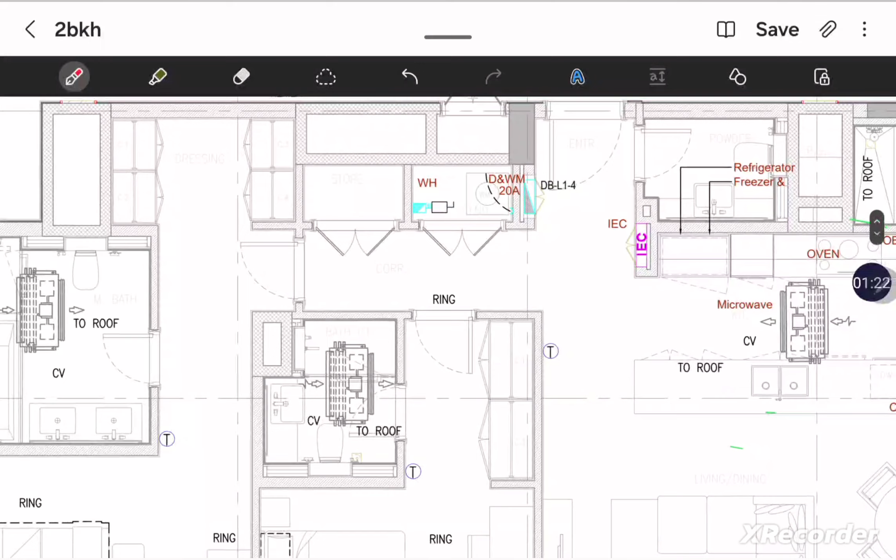Then we have one laundry and one storage area. Then we have one powder toilet which is for guest use. Then we have one maid room and maid room toilet. We have one open kitchen and we have one dining and living area.

Let us place first double socket and single socket as per requirement. So here there is one master bedroom, so we need one double socket here, and here we need double or single socket. So let us take single socket. Here in front of the bed we will place the TV, so we will require double socket.

Now let us move to our next room, that is the children room. Here also the same. Near the bed we need one double socket, other side we need single socket, and in front of the bed we need one double socket for the TV power.

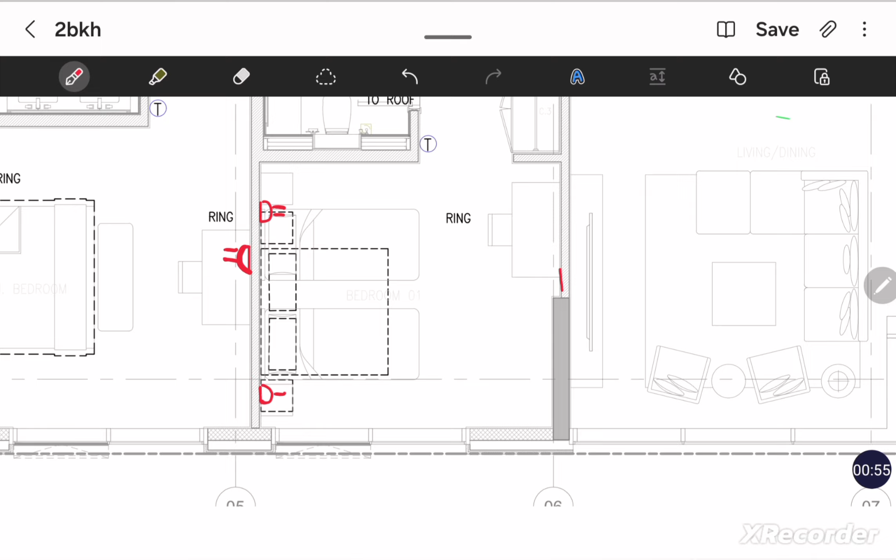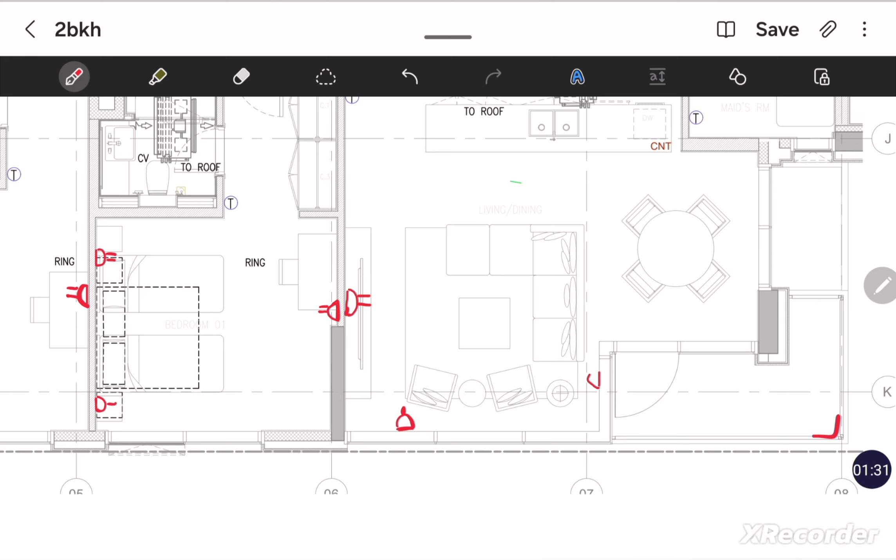Now let us move to the living and dining area. Here you see there is one TV placement, so we need one double socket near the TV. Here you see there is a sitting arrangement and this is the wall, so we will place one socket here and one socket will be here. It could be single socket or double pin socket.

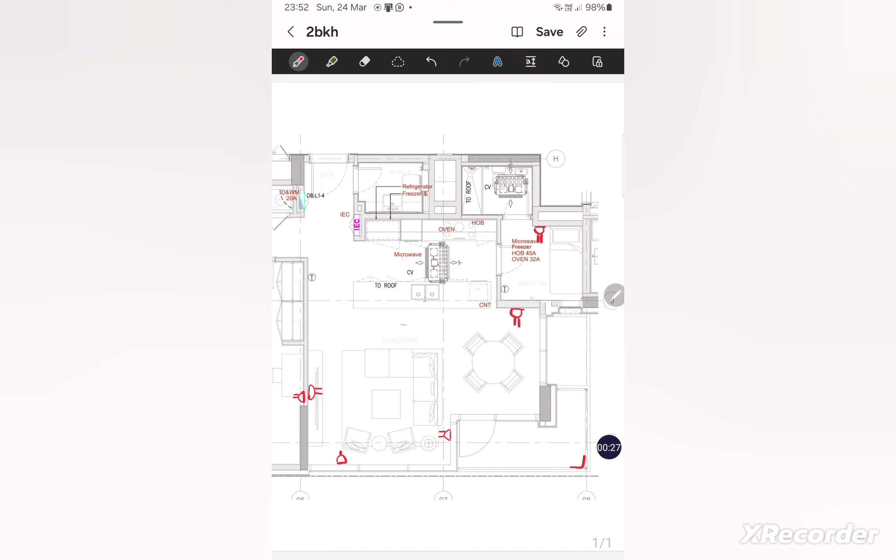Now we will place the single or double socket for the dining area. So we will place one double socket here near the dining table, and for the maid room we will place one double socket here, and we could place one more socket here in the maid room. Apart from that, we need one socket also here for the corridor and for cleaning purposes.

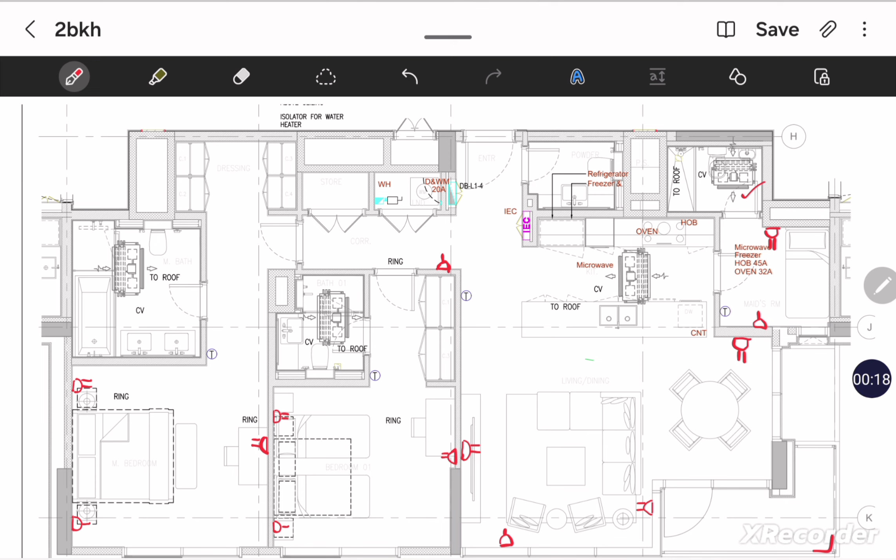Completing the single and double socket placement, we will consider the power points for the FCUs. Here you can see there is one FCU. Here there is one FCU. Here there is one FCU. Here there is one FCU. This FCU will feed the maid room and its toilet. This FCU will feed the living and dining area and the passage.

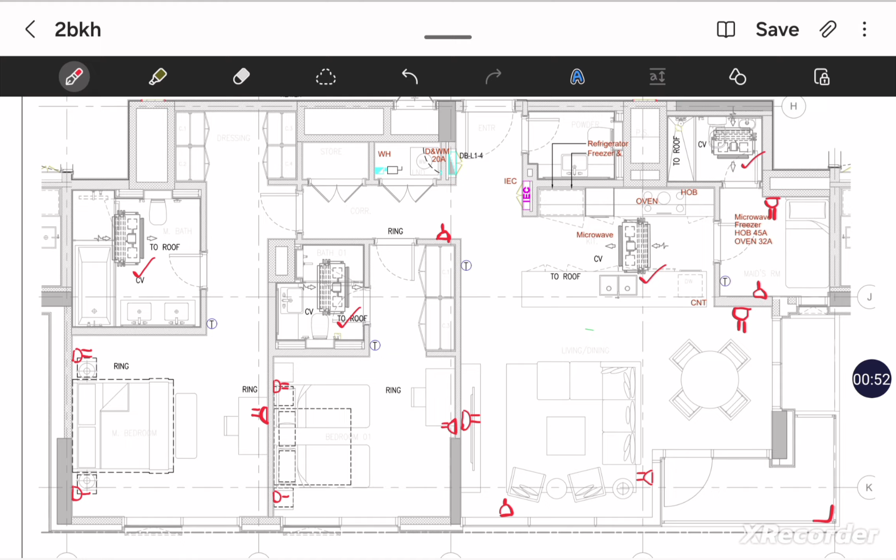This FCU will feed the children bedroom, and this FCU will feed the master bedroom and its related passage and dressing room. So we need to arrange the power for this FCU. For that we will place one spur outlet for the FCU. So here I place one FCU spur outlet. Here I place one FCU spur outlet. Here I place one FCU spur outlet, and here I place one FCU spur outlet.

Hope you are clear. Let us focus on placing our power outlets as per the required load in the kitchen. Here you see this is the fridge. This is the microwave. Here there is an oven and hob inbuilt. We have one dishwasher here. So we will place our power outlets as per the equipment.

So for the fridge we need one 13 ampere socket. For the microwave we need one 20 ampere socket. For the oven we need one 32 ampere socket. For the hob we need one 45 ampere socket. And for the dishwasher we need one 20 ampere socket or spur or flex outlet.

As per the DEWA regulation, we have to provide the DP switch also for some equipment like hob, oven, microwave and dishwasher. If you're wondering how I selected the rating for the microwave, oven, hob and dishwasher, you will check it from the catalog of the final fixtures. Then you will find their load also. Based on their load, you have to select the flex outlet rating and in the DB their breaker rating.

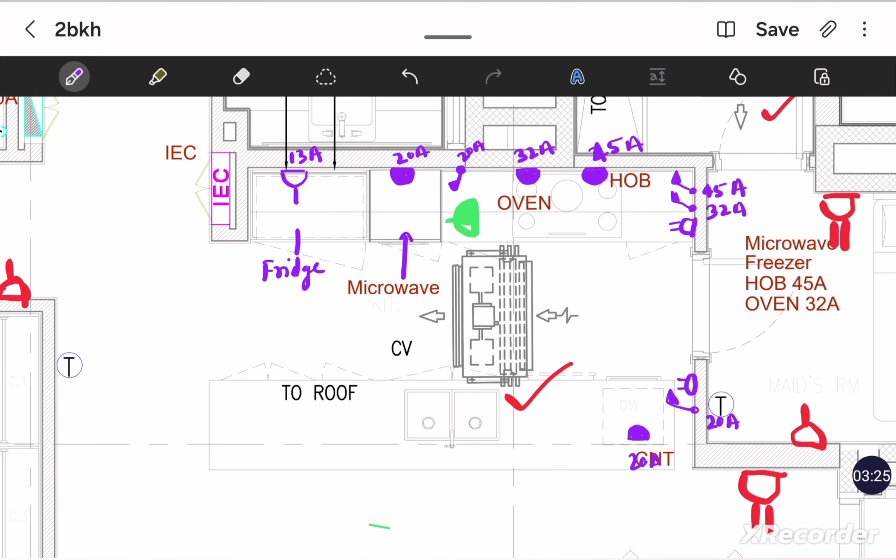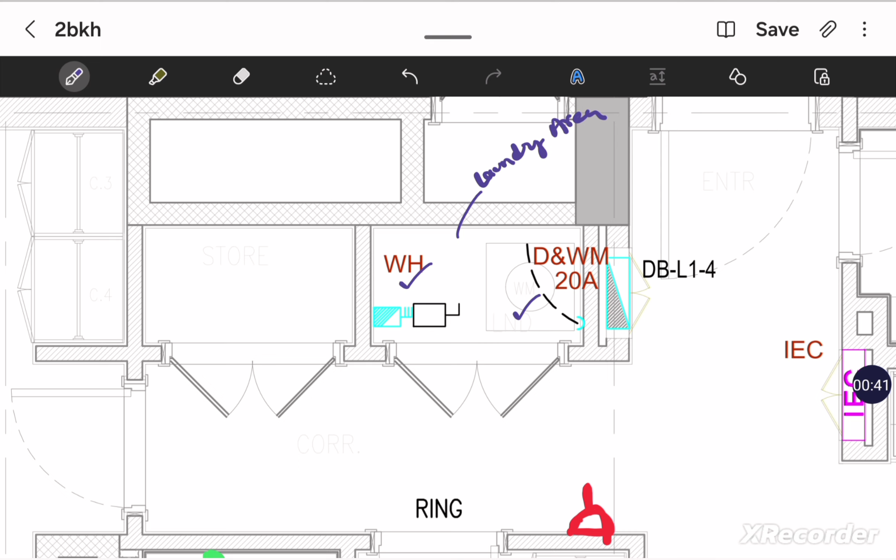After placing power sockets based on the equipment in the kitchen, now let us focus on the laundry area. This is the laundry area. In the laundry area, we have two things. One is washing machine, one is water heater. Here in this apartment, it is a centralized water heater, meaning in each bathroom we don't have any water heater. We have one water heater for the full flat and it will supply the hot water to every bathroom. Okay. So here there is one circulation pump also to circulate this hot water within this flat.

So we have three appliances here. One is washing machine, hope you can see here WM. One we have water heater and one we have circulation pump. Here it is mentioned, it's not shown here. It is circulation pump. So we have three appliances here. For the washing machine we need one flex outlet of 20 ampere and we need one DP switch for that flex outlet which would be of 20 ampere. Apart from that, we will place one isolator of 20 ampere for the water heater and one isolator for the circulation pump of 20 ampere.

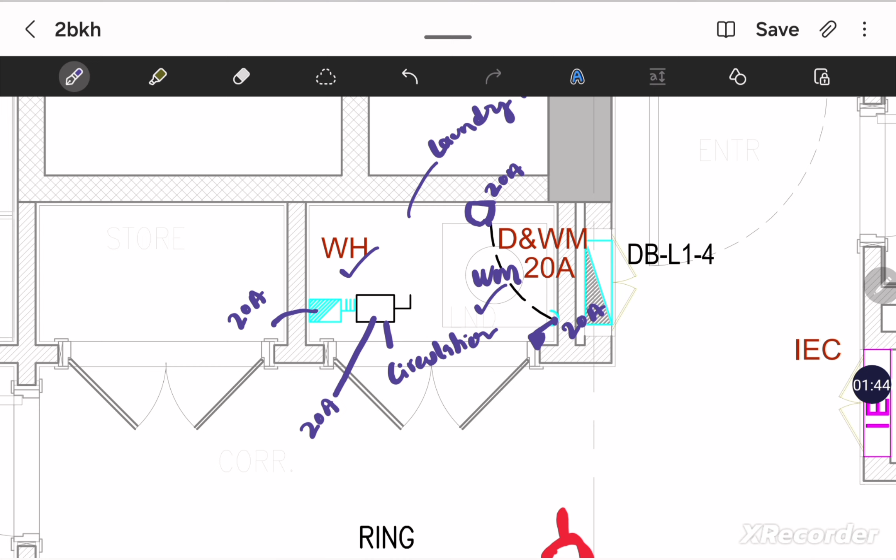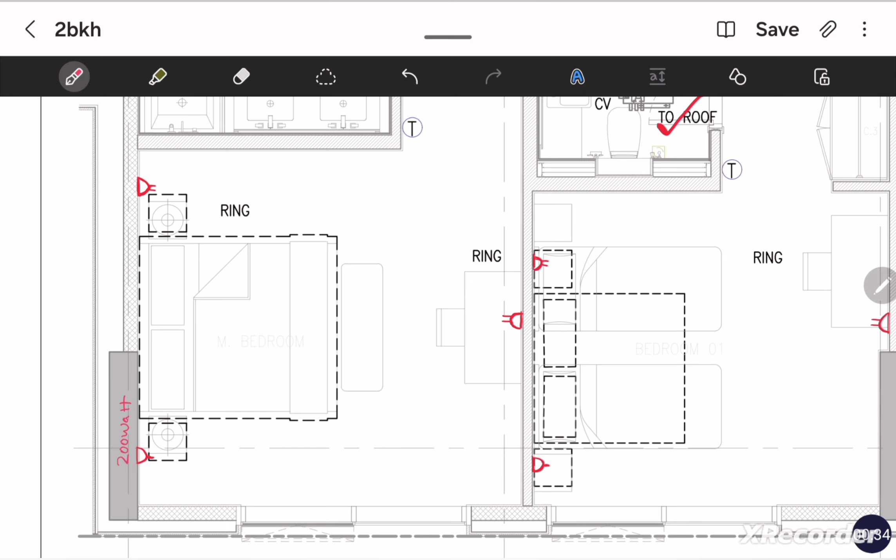Now after placing all the power outlets as per our requirement, we have to consider the load for each power outlet. As per the DEWA regulation, on the single socket the power assumed is 200 watt. So this power socket will have a load of 200 watt. In the same way, this is the double socket. So the load assumed on this double socket will be 200 plus 200, that is 400 watt. In the same way, we will write for all the power outlets. So here I will write it is 400 watt. It will be also 400 watt. It will be also 200 watt.

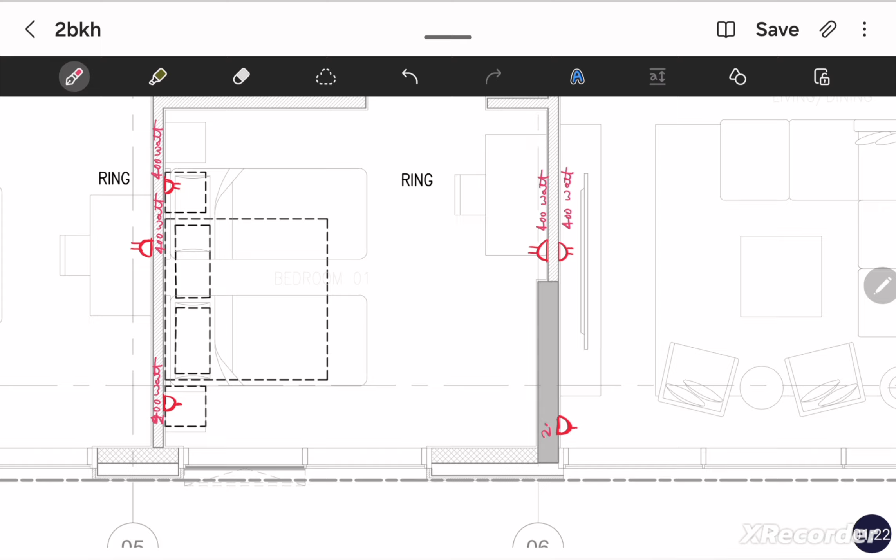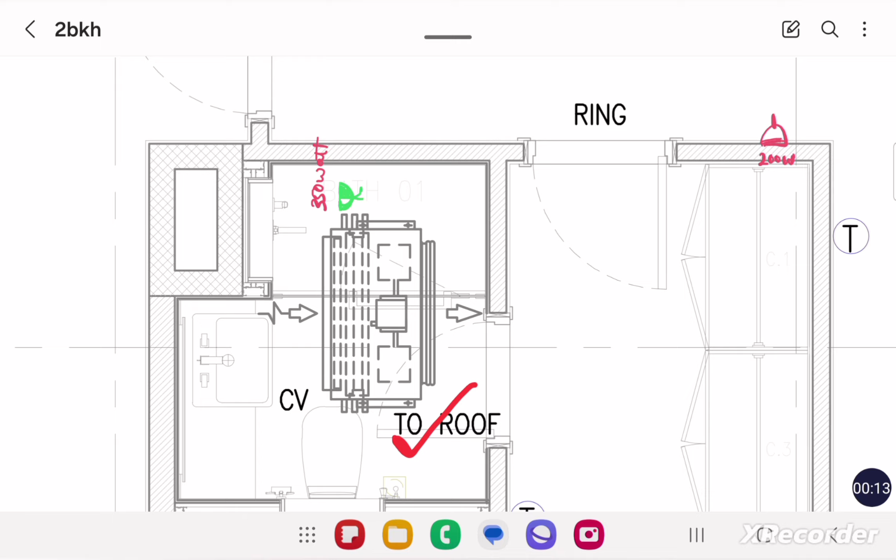This will be 400 watt, 400 watt. This will be 200 watt. Wherever you find the general purpose socket, write the assumed load as per the DEWA regulation. Like for the single socket it will be 200 watt. For the double socket it will be 400 watt. After writing the single socket and double socket load, we have to write the load for each FCU. Here all the FCUs are typical and the load of each FCU is 350 watt. So I mention here 350 watt. I mention here also 350 watt and here also I mention 350 watt.

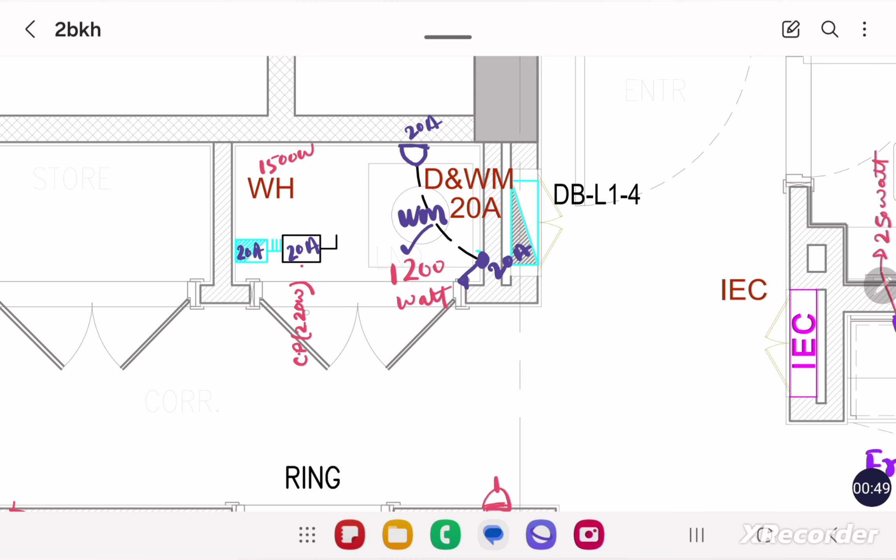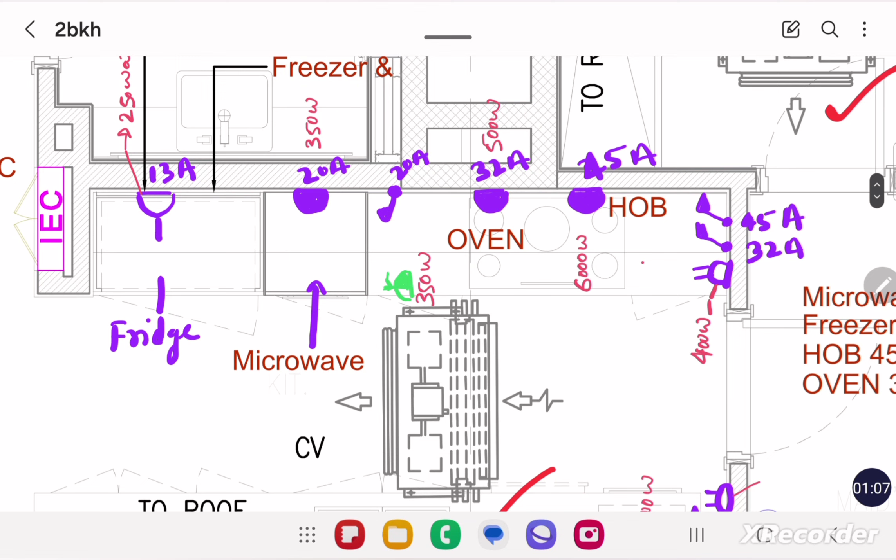After that we have to write the load of the equipment placed in the laundry. So the washing machine has a load of 1200 watt. Circulation pump is 220 watt. Water heater, which is a general water heater for the whole flat, has a load of 1500 watt. If we write the load of the kitchen equipment, then the fridge is 250 watt, microwave 350 watt, oven is 500 watt, hob is 6000 watt and the dishwasher is 1200 watt. So we write all the loads of the equipment placed in this 2 BHK flat.

If you are wondering how I wrote the load for each and every equipment, then I will tell you: from the client all these equipment will be approved and we will refer to the material submittal for each equipment to get the load of that equipment. So by referring to the FCU technical material submittal, we will get the load of the FCU. By referring to the water heater technical material submittal, we will get the rating of the water heater. In the same way for the washing machine, microwave, freezer, oven, hob, this you will receive from the client or from the consultant also. So by referring to that document received from the client or the consultant, or by referring to the technical submittal, you will get the load of each equipment.

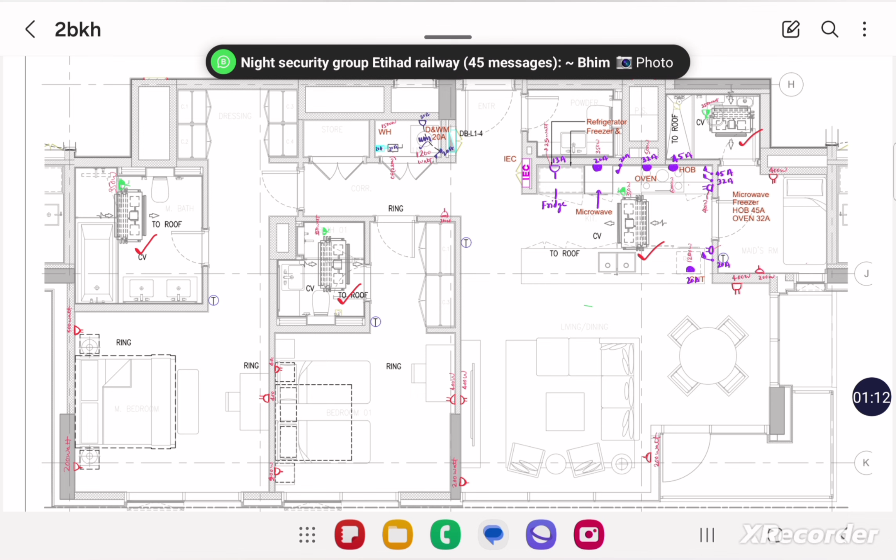There is one more thing I want to add here. If you don't have any information regarding the equipment load, then DEWA also has some general loads for each equipment. And based on the load of that equipment, we have to make a load schedule.

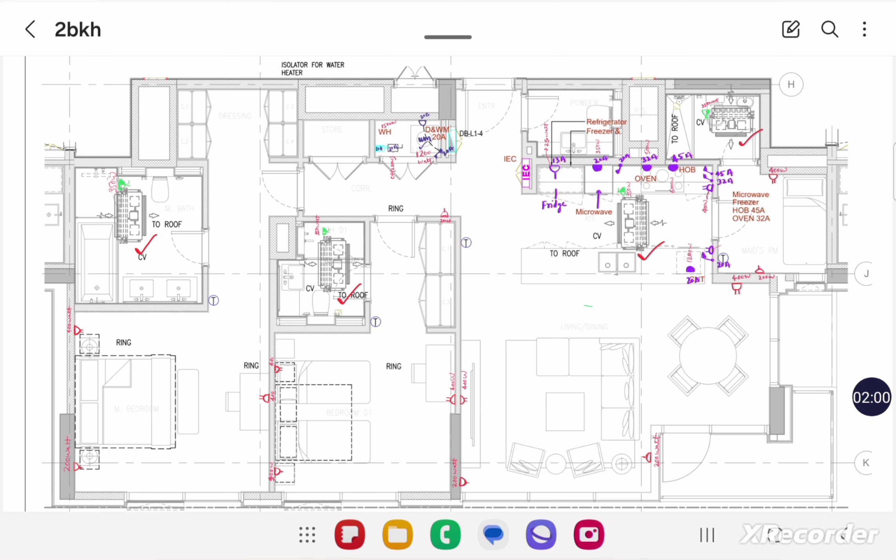But DEWA is also emphasizing that you write the actual load, because in any case you have to reflect the actual load in the as-built submission for the DEWA approval. So better refer to the technical submittal for the actual load of the equipment.

Placing the electrical outlets as per the equipment requirement, we will make the circuit formation between these electrical outlets, but it will be as per DEWA regulation. So before starting the circuit formation between the electrical outlets, let us understand what DEWA says.

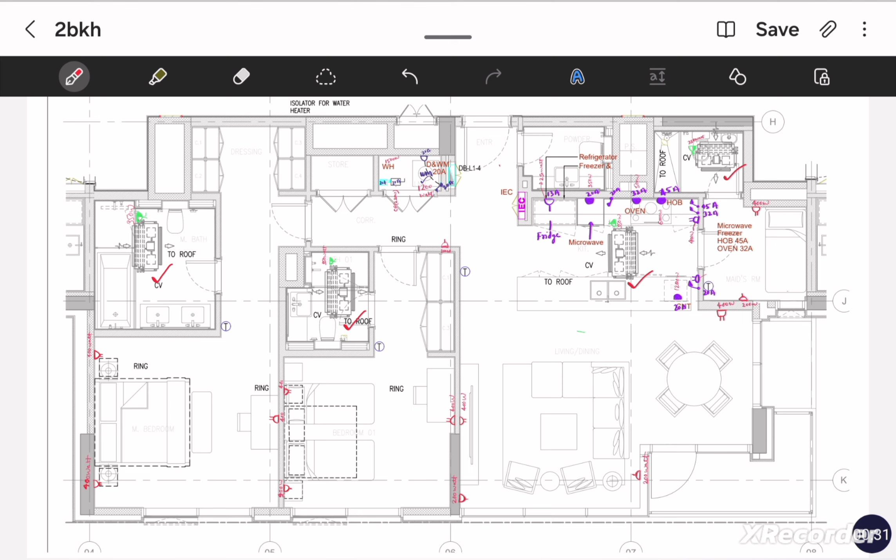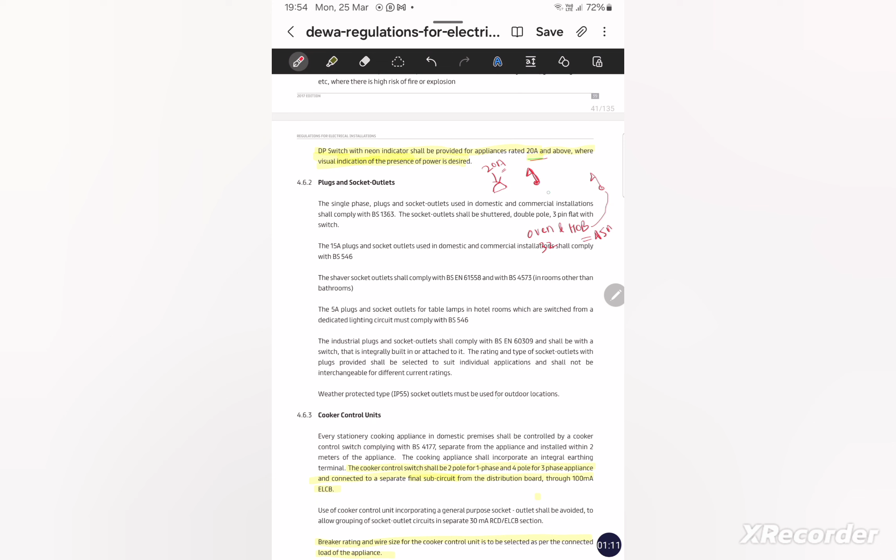So the first thing which you will observe in the DEWA regulation is that if any appliance is rated more than 20 ampere, then we have to use a DP switch for that equipment. So any equipment having a load current more than or equal to 20 ampere, we need to put a DP switch for that equipment. In our case, you notice that for the microwave, for the oven, and for the hob, we provided DP switches depending on their rating. Like for oven, I provided 32 ampere, for hob I provided 45 ampere, and for microwave I provided 20 ampere DP switch. So this is the first thing we observe from the DEWA regulation.

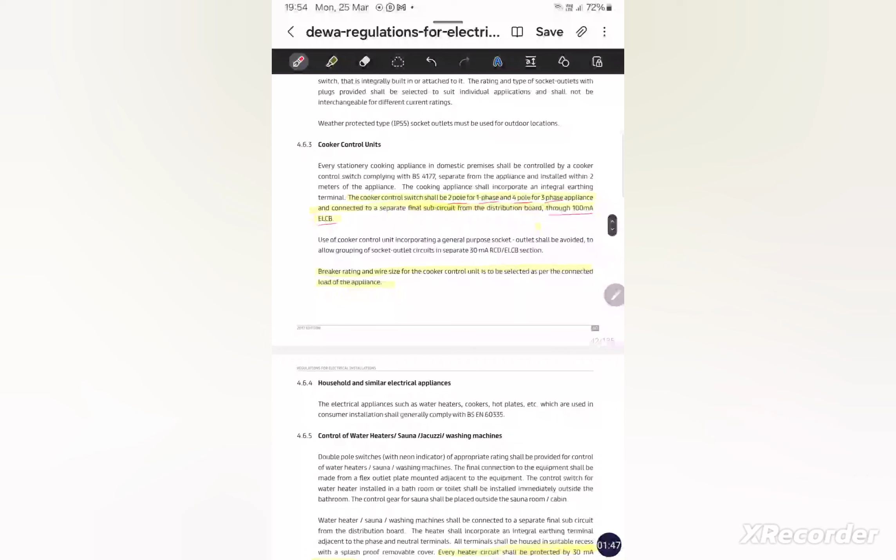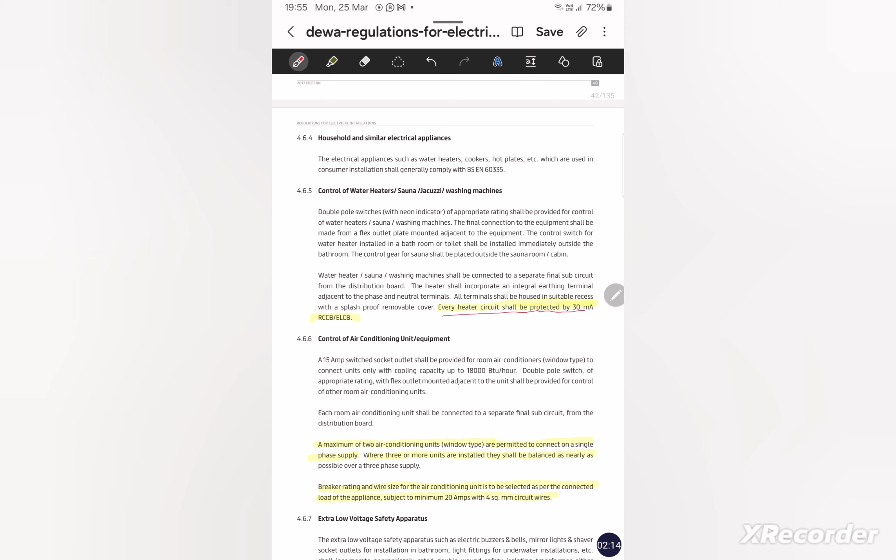Apart from that, you will find that the cooker unit should be 2 pole for single phase and 4 pole for 3 phase application, and the cooker unit must be fed through an ELCB having a sensitivity rating of 100 milliampere. The other thing which you will find is that the cooker wire size will depend on the rating of the cooker. Here the cooker and hob is the same. Okay. Now the other thing which you will find in the DEWA regulation is that every heater circuit shall be protected through a 30 milliampere ELCB or RCCB.

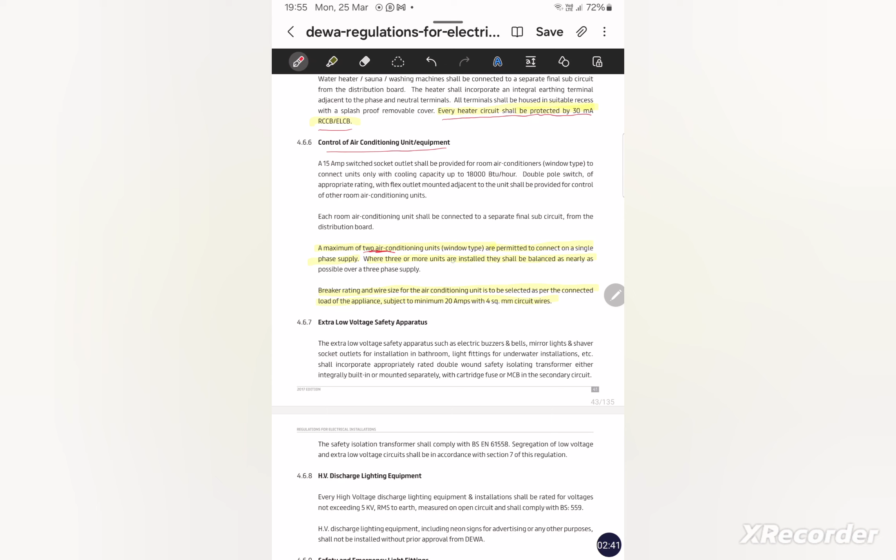For the AC unit, there is one important point mentioned here, that a maximum of 2 air conditioning units can be connected on a single phase supply. Okay. And the other thing which is mentioned is that depending on the rating of the air conditioning unit, we have to select the breaker rating as well as the wire size, but the minimum size is to be 20 ampere for the breaker and 4 square mm for the wires. Apart from that, we will see in the DEWA regulation that in a light circuit, the maximum load allowed is 2000 watt, the wire size should be 2.5 square mm and the breaker rating must be 16 ampere.

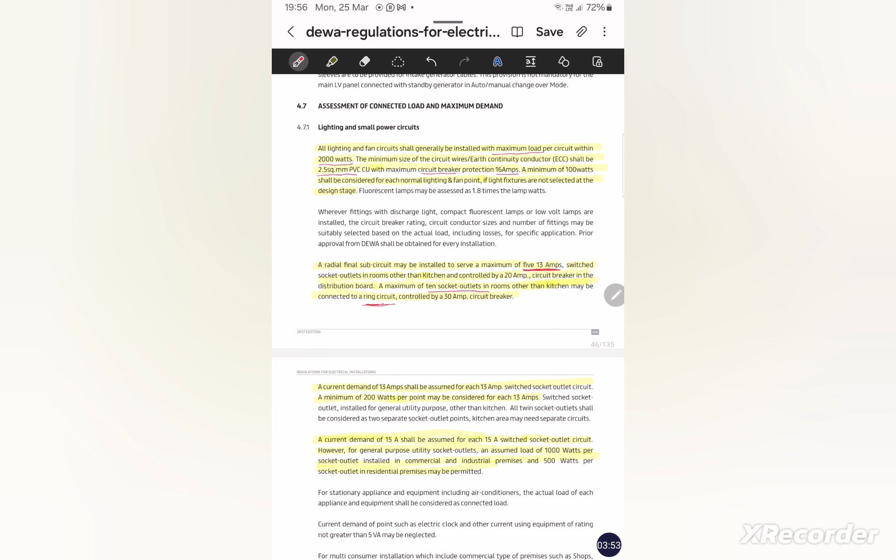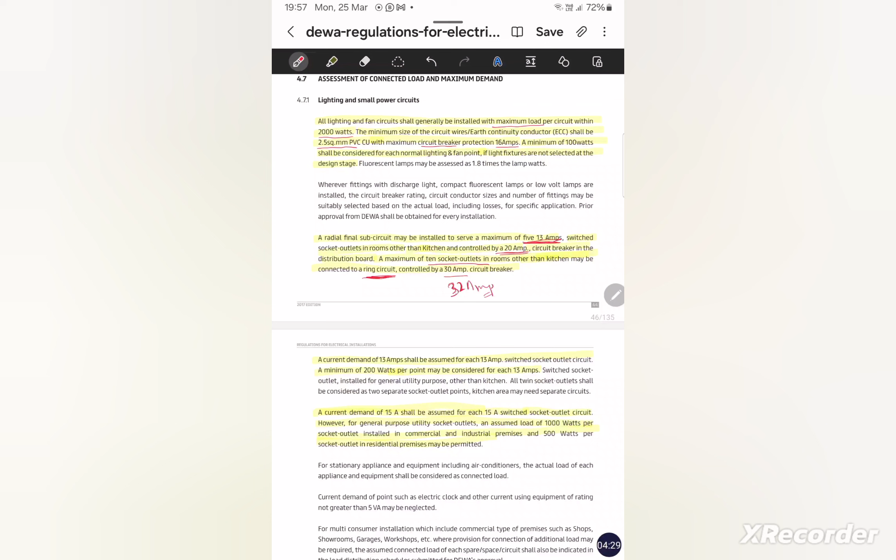Another thing which you will find in the DEWA regulation is that a maximum of 5 13-ampere sockets are allowed in a radial circuit, and 10 socket outlets can be looped together in a ring circuit. Here it is also mentioned that the radial circuit must be fed through a 20 ampere breaker, and the ring circuit having from 5 to 10 single sockets must be controlled by a 30 ampere circuit breaker. Here we will take a 32 ampere circuit breaker for practical reasons, because 30 ampere circuit breakers are not available in the market. So for the ring circuit we will use a 32 ampere breaker, and for the radial circuit we will use a 20 ampere breaker.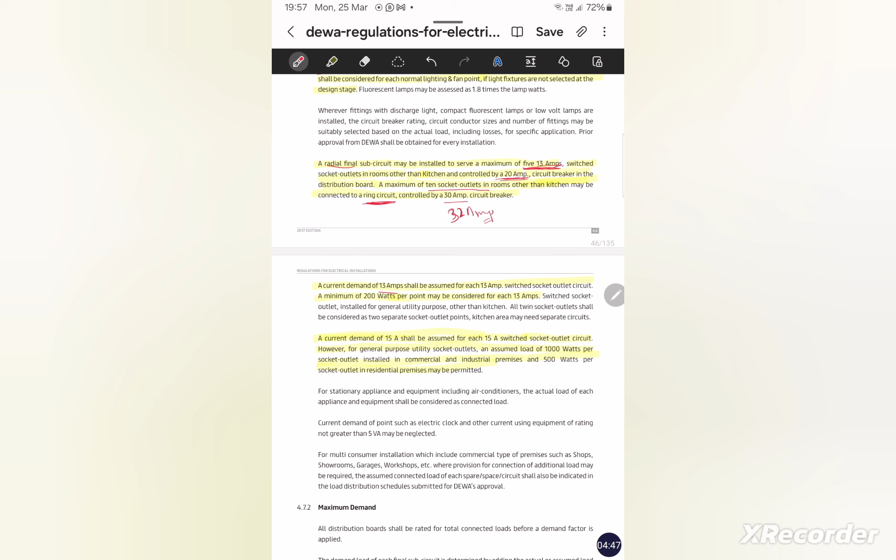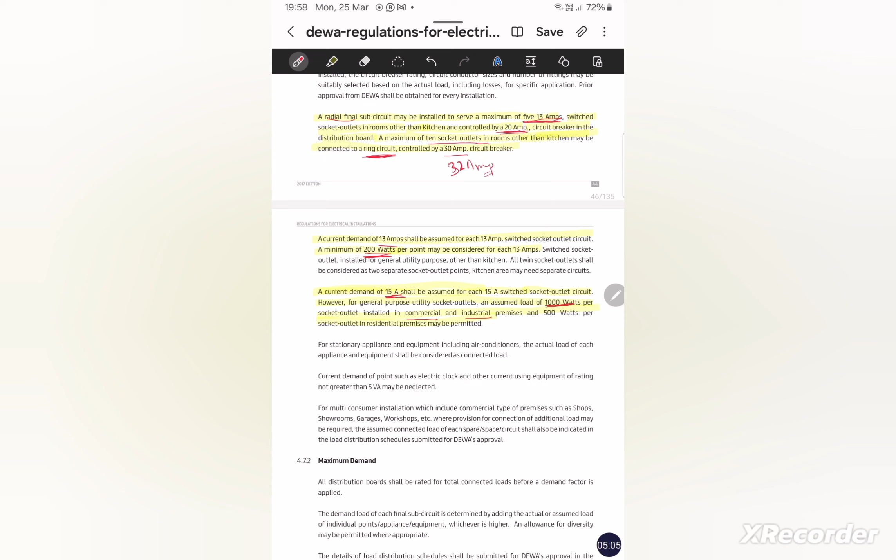Apart from that, in the DEWA regulation, it is mentioned that the assumed load on a 13 ampere single socket is 200 watt. Okay, and on a 15 ampere socket, the assumed load is 1000 watt for commercial and industrial buildings, and for residential buildings, it is 500 watt. Hope you understood this point.

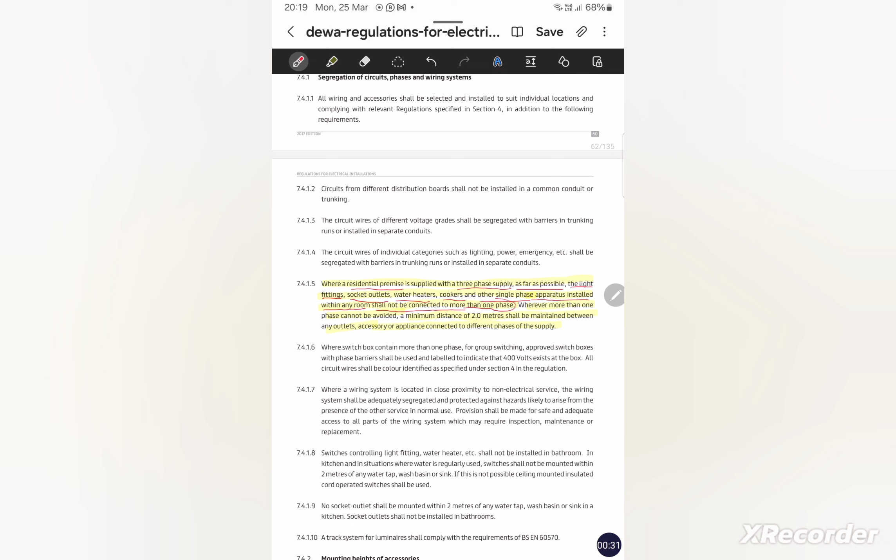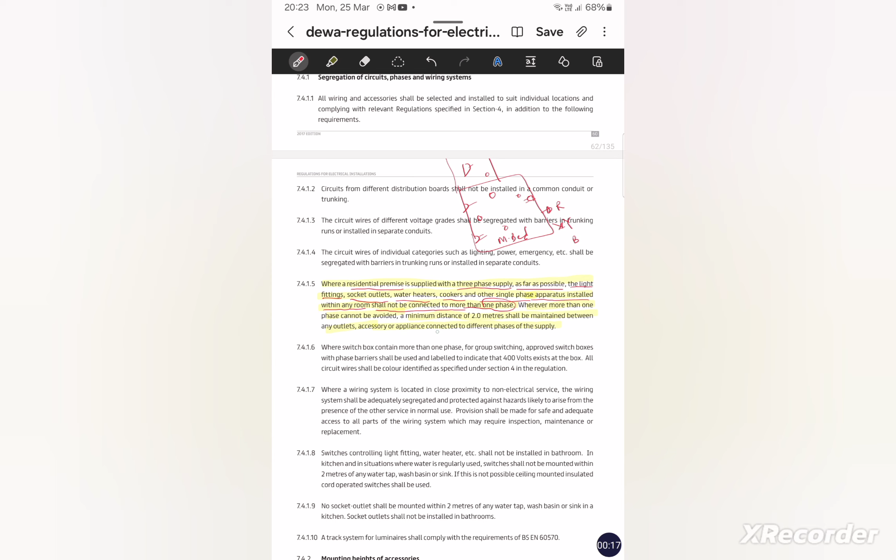The other very important point mentioned in the DEWA regulation is that in residential premises where the power supply is 3-phase, then as far as possible, the light fittings, socket outlets, water heater, cooker and other single phase appliances installed within a room shall not be connected to more than one phase. What does it mean? Suppose here we have one master bedroom, okay, then we have some sockets, then we have some lights, in the bathroom we have FCU, then all these loads, whether it is the sockets, lights, FCU, any heater, should be fed from either R phase or Y phase or B phase. Meaning, we should not mix two phases in a single room. As far as possible, we have to maintain that. But wherever it is not possible, then we have to maintain a minimum 2 meter distance between the two different phases. Hope you understood this one.

After discussing some of the DEWA regulation points related to designing the circuit formation within a flat, we will start the circuit formation. So here I will start from the master bedroom.

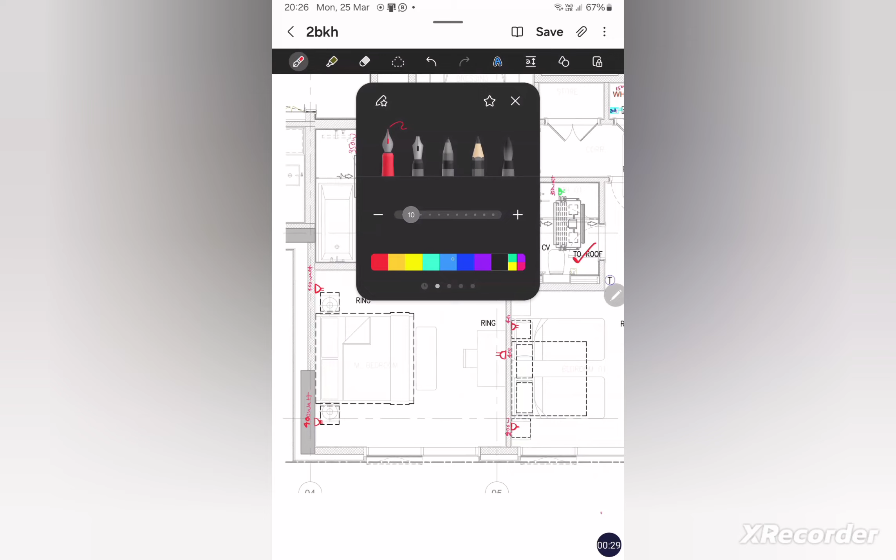Here we have 3 double sockets. Okay, so we will make one circuit formation between these outlets. So I will make one circuit and it will go to the DB. Here you have to notice that we have a total of 6 single outlets, or we can say 3 double outlets.

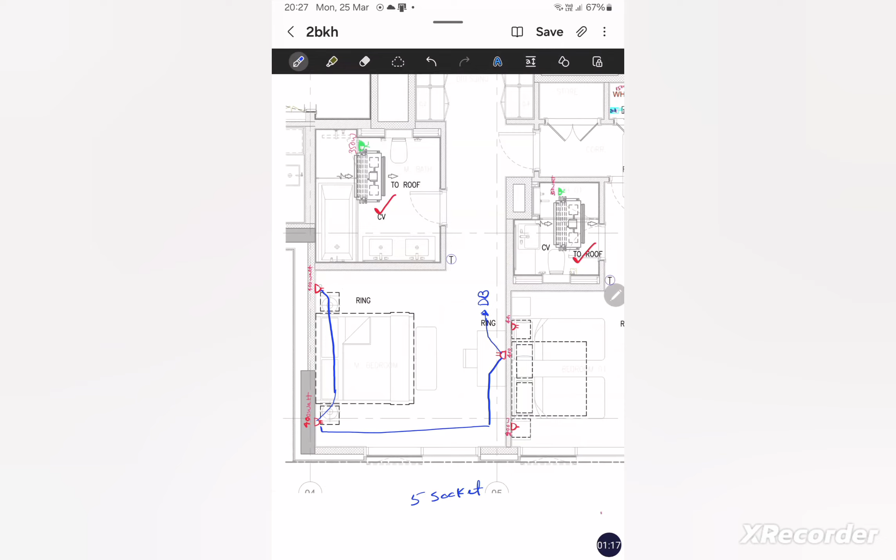As per DEWA regulation, how many sockets are allowed in a radial circuit? That is 5 sockets. Okay, but here we have 6 sockets, 2 plus 2 plus 2. So we have to go for the ring circuit. So the main will be supplied from both ends. Hope you understood this one.

Now let us move to the other bedroom, that is bedroom number 1 or the children's bedroom. Here you will see there is one double socket, one single socket and one double socket. And in the corridor also we have one single socket. So we will loop all these sockets together to make the circuit formation. So I will loop it here.

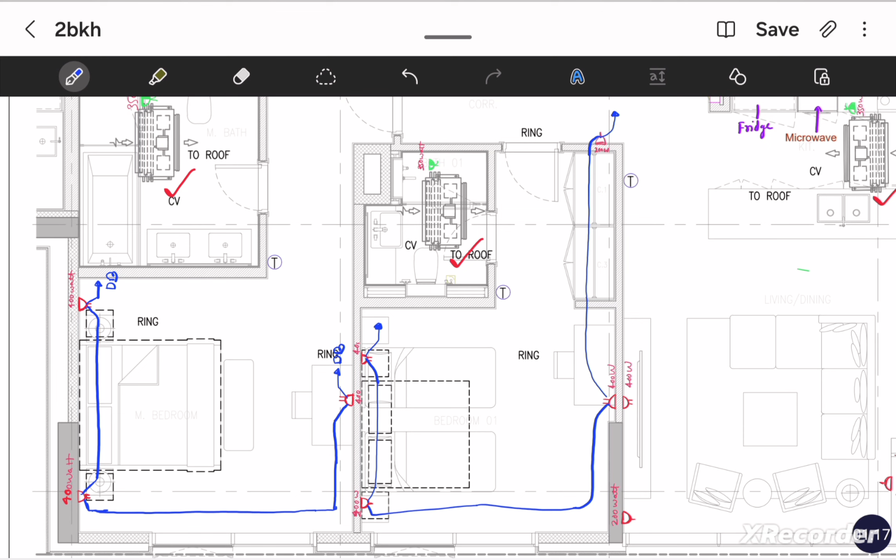Here you also see that there is a total of 2 plus 1 is 3, plus 2 is 5, plus 1 is 6. Total 6 single sockets. Then it would be a ring circuit, because after 5 single sockets we need to make a ring circuit. So here also we make one ring circuit. That is, the supply will come from both ends of the circuit. Now we completed the circuit formation in the master bedroom and the circuit formation in the single bedroom.

Now let us make the circuit formation in the living and dining area. So here you find that there is one single socket, one single socket, one single socket and one double socket. So let us start the circuit formation.

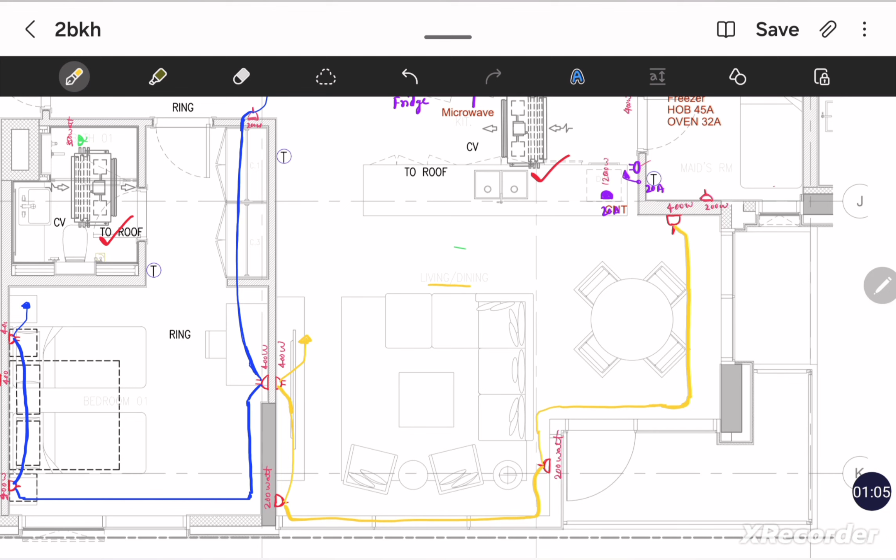Here you observe that there is a total of 5 single sockets in that loop. 2 plus 1 is 3, plus 1 is 4, plus 1 is 5. So it needs only a radial circuit. So we will make one main supply from the DB, as it is only a 5-socket circuit.

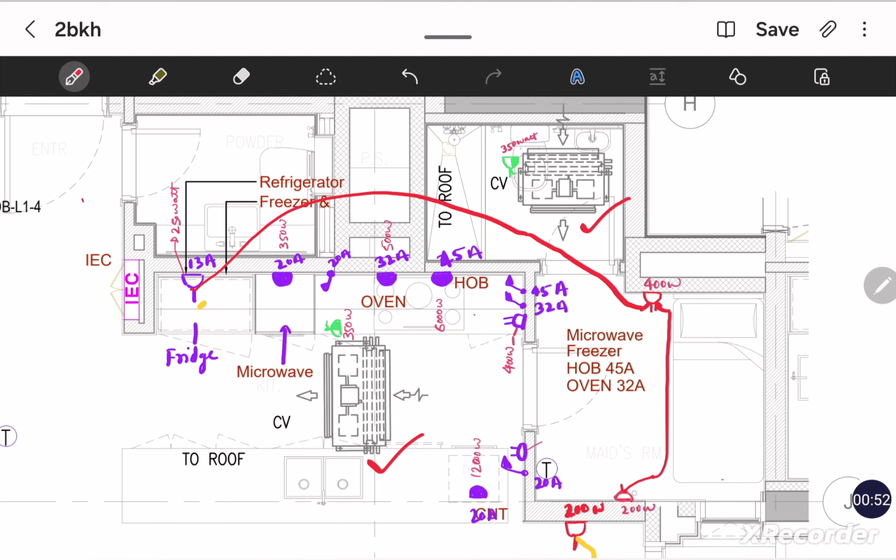Now let us make the circuit formation for the maid room. Here I will take the maid room sockets loop with the fridge, which is placed in the kitchen. So I will make one circuit. So I make one circuit between the maid room outlet and the fridge. Here you see that there is a total of 4 outlets in the circuit. 1, 2 and 1. So total 4. So it will be a radial circuit.

After making the circuit formation for the general purpose sockets, now let us focus on the FCU circuit formation. As we discussed in the DEWA regulation, as far as possible we should not mix two circuits, two phases, in a single room. We have taken the blue phase for the general purpose socket in the master bedroom and in bedroom number 1. So the blue phase must be considered for making the circuit formation for the FCU. In that way we will not change the circuit color. So let us make the formation of the circuit for the FCU.

Here I want to highlight one more important point. During the DEWA regulation explanation, I told you DEWA allows a maximum of 2 FCUs in a single circuit. That's why I make 2 FCUs in a single circuit. Hope you understood this one.

Now let us make the circuit formation for this FCU and this FCU. As you see, we have taken the red phase for the maid room and maid room toilet. So we have to use the red phase only to make the circuit for the FCU. So let us take the red phase. And the main will go to the DB.

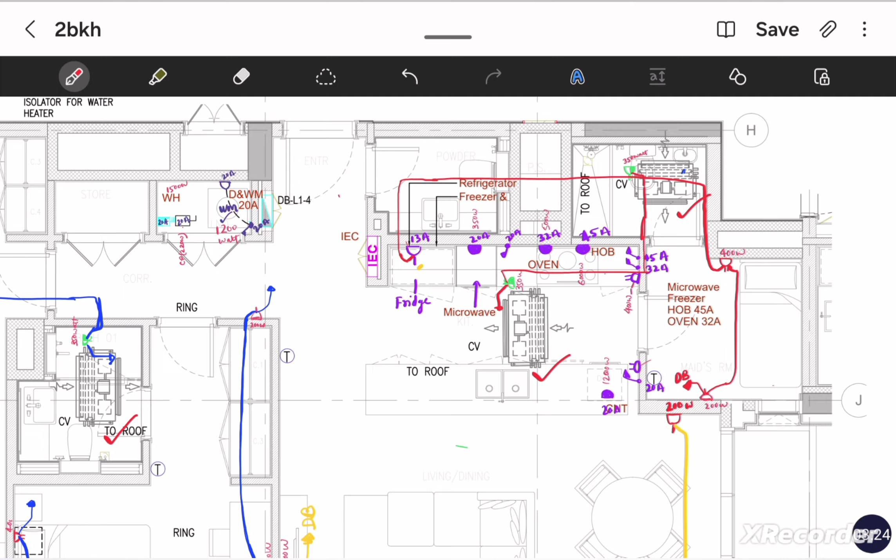So what we have done, we have made the circuit formation for the FCUs, and we considered the DEWA regulation during forming the circuit for the FCUs. What are the things we considered? We considered that a single room should have a single phase, and we should not mix another phase in a single room, which we have done. We have taken the maid room general purpose socket as a red circuit, so we make the FCU circuit formation from the red circuit only. In the master bedroom, we have taken the blue phase for the general purpose socket circuiting, so we have taken the blue phase only for the FCU circuit formation.

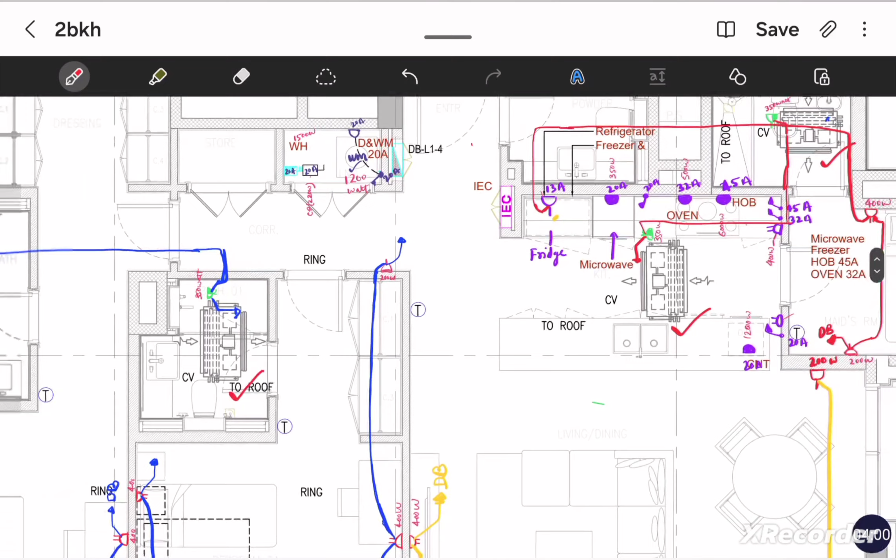The second thing we followed from the DEWA regulation is that DEWA says two FCUs are allowed to connect in a single circuit. So we have connected two FCUs in a single circuit, here and here. But here I want to highlight one more important point. If the load is more on the circuit, then we can take a single FCU as a single circuit. But here the load is very less, 350 watts, so we have an option, and DEWA also permits two FCUs in a loop, so we looped it. Hope you understood so far.

Now let us make the circuit formation for the kitchen equipment. Here you see that there is one microwave and its DP switch. So let us loop the DP switch with the microwave flex outlet, and the circuit will be radial. So one main will directly come from the DB.

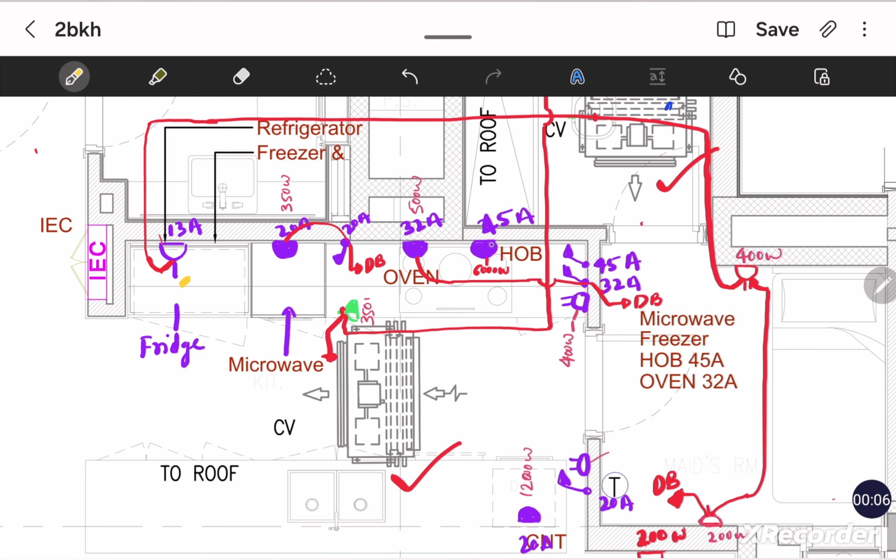Here you see there is an oven and its DP switch. So let us loop this oven flex outlet with its DP switch, and it will also be a radial. So one power supply circuit will come directly from the DB. In the same way, we will loop the flex outlet of the hob with the DP switch, and one main will come directly from the DB to the hob DP switch.

Maybe you are wondering how I am considering the blue phase, yellow phase, red phase in different rooms. This is a trial and error method, meaning we have to make the circuit formation and we have to check the balancing in the load, whether R phase, Y phase and B phase are equal or not. Depending on that trial, we have to change the circuit number during designing. But in order to avoid a longer video, we tried it before making this video, and then I am making the circuit color.

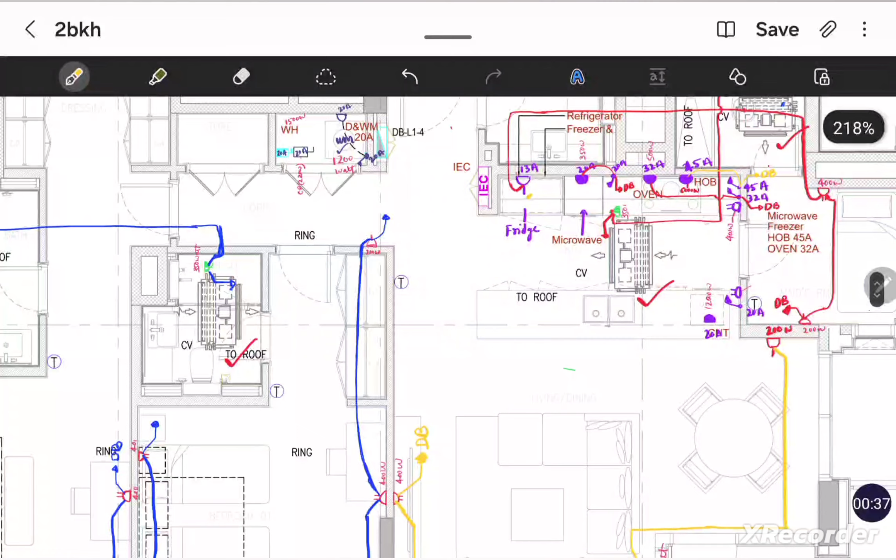I will give you one trick to balance the load in 3 different phases easily. You have to identify which one is the bigger load compared to the other loads. Like in this flat, the hob is the biggest load, having a load of 6000 watt. Suppose I consider the yellow circuit for the hob, then don't use the yellow circuit for the other loads. In this way you will balance the load between the 3 phases easily.

Here if you notice, I consider the yellow phase for the hob, then for very few circuits, only one circuit, I use the yellow phase, and all other loads I connected either with the red phase or with the blue phase. If you do so, the balancing will be easy.

I will tell you one more important thing: if you practice designing more, you will automatically develop the critical thinking, during the designing stage, to know whether adding to the red circuit, Y circuit or blue circuit will make the load imbalanced or more balanced. This will come with practice.

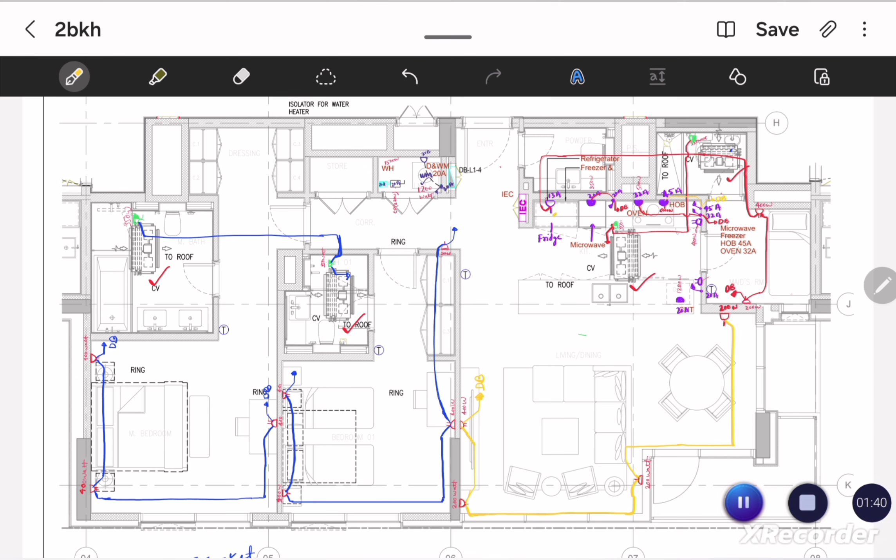Let us focus on the equipment placed in the washing area, laundry area. Here we have one washing machine, a water heater, and a circulation pump to circulate this hot water throughout all the toilets. The washing machine has a rating of more than 20 ampere, so as per DEWA regulation, we need one DP switch and it will be a radial circuit.

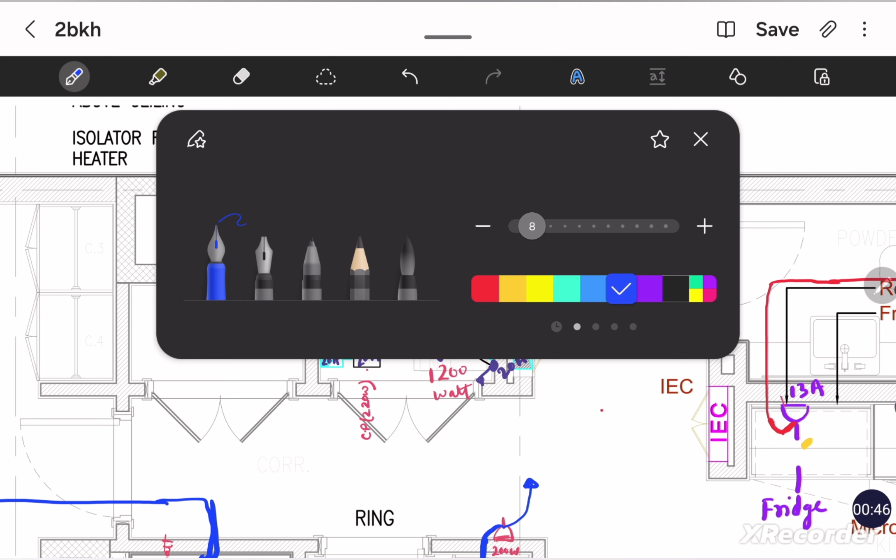So let us take a circuit. For the washing machine, I'm considering a red circuit. For the circulation pump, I'm taking a blue circuit and it will go directly to the DB. For the water heater, I'm also taking a blue circuit, which is directly fed from the DB as a radial circuit. Hope you got the power outlet distribution and its circuit formation from this overall discussion.

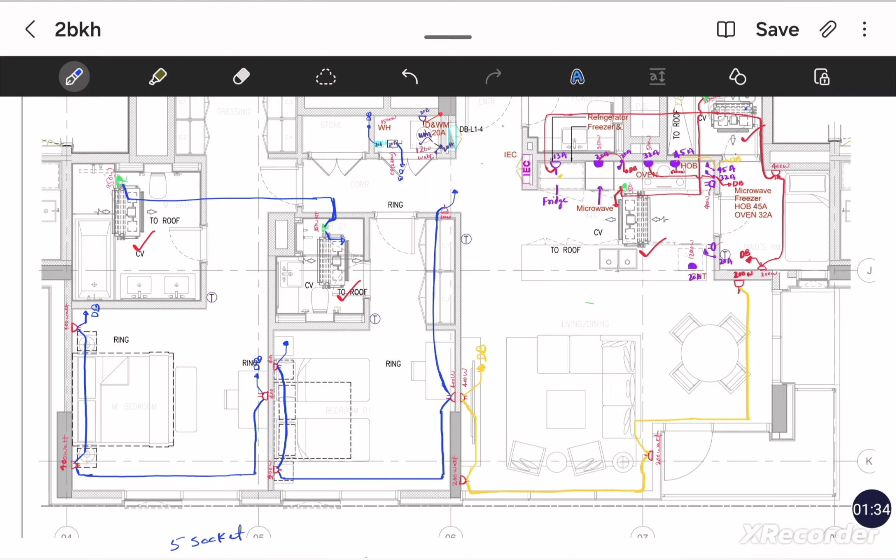We will now make the light circuit formation for the same flat, and then we will proceed to the preparation of the load schedule. Let's start designing the light layout for this 2 BHK flat. DEWA doesn't have any hard rule for the light layout. What rule DEWA has related to lights, I will explain now.

DEWA says, for the light-related regulation, in a particular circuit, suppose there are 5 lights. Okay, the combined load of these lights should not exceed 2000 watt.

Meaning, suppose there are 5 lights and the total combined load of these 5 lights is 2000, meaning each light will have a load of 400 watt in this example. So 400, 400, 400, 400 and 400. So 400 into 5 is equal to 2000 watt. So for a particular circuit, DEWA is not considering how many lights there are, but the combined load for those lights should not exceed 2000 watt. Hope I'm clear.

The second rule related to light is that the light circuit must be controlled by an ELCB, which should have a rating of 100 milliampere or in some cases 30 milliampere. Like if some lights are feeding the garden area or the wet area, the light should be controlled by an ELCB with a rating of 100 milliampere in normal situations, and in some special situations it should be controlled by 30 milliampere.

Apart from that, DEWA has one more important regulation related to light, which is that the light circuit wire must be 2.5 square mm: phase wire, neutral wire as well as earth wire. This should be the wire size of the light circuit.

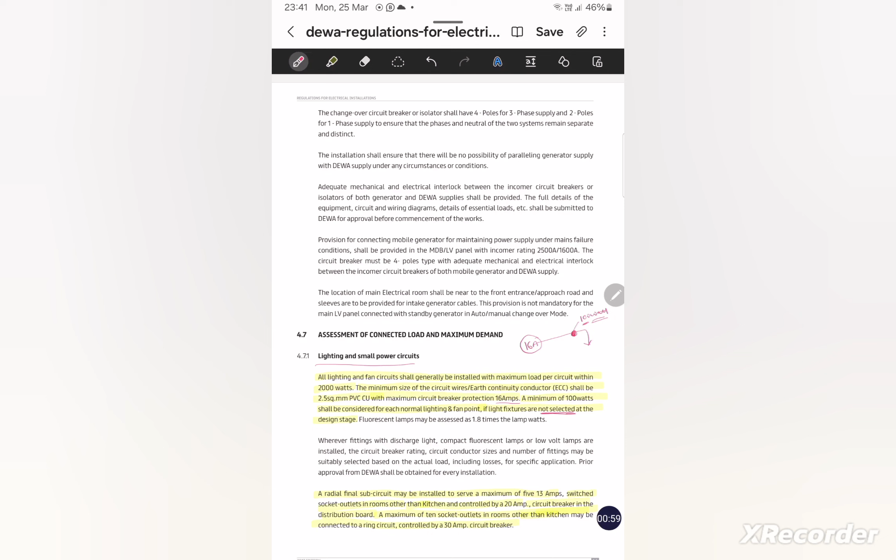After discussing the DEWA regulation related to light, let us make the circuit formation for the light. Before that, I'll tell you the load I took for different types of light. The brown dots represent the dry area lights, and that light load is 8 watt. The wet area lights are indicated by the green dots, in the laundry area, the toilet area, the powder bathroom, and the maid toilet. This light load is considered as 22 watt. All these green lights are typical lights, and all brown lights are typical lights.

The load for the chandelier light is taken as 300 watt, and the load for the strip light is 14 watt per meter. The maid room light has a load of 18 watt and the balcony light has a load of 20 watt. I took these loads from the light technical data sheet because in my case the light is already approved by the client and consultant. So I referred to the technical submittal and found the load for each light. Now after getting all this information, we can make the circuit formation for the light.

You know that in the power layout, I took the blue circuit for the general sockets in the master bedroom and bedroom number 1. For the dining and living area, I took the yellow circuit for the general purpose sockets. For the maid room and maid toilet, I used the red circuit. For the kitchen, I used the red circuit, and only for the hob I used the yellow circuit. For the laundry, I used red and blue circuits: red for the washing machine and blue for the circulation pump.

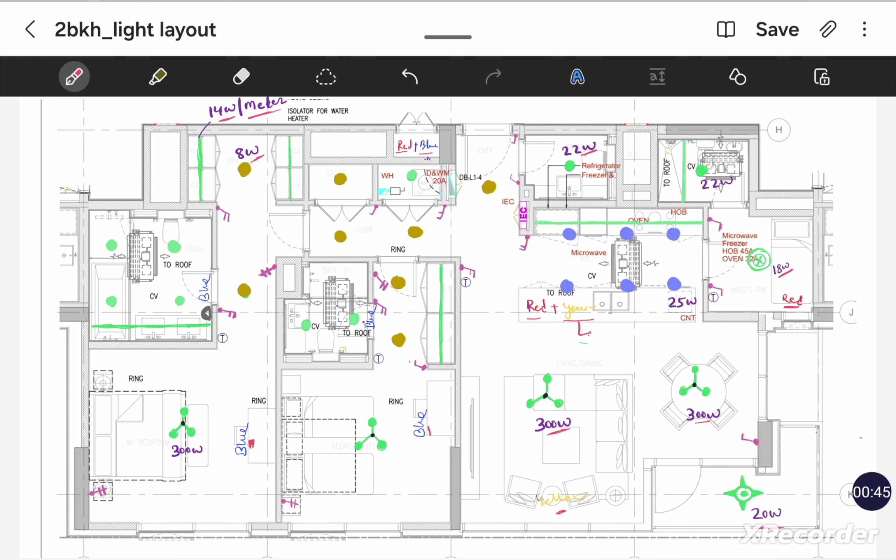We will make the circuit formation first for the master bedroom and master bedroom toilet area, which I am highlighting here. For this area we will make one circuit, which will obviously be a blue phase circuit. So let's start. From here I will take the power from the DB and loop it to this strip light. From this strip light I will give power to the other strip light, then to the wet area light, and I will loop all the bathroom lights.

From this bathroom light I will give one loop to the strip light, from this strip light a loop to the chandelier light, and from the chandelier light one loop to the dry area light. So in this way we made one blue light circuit covering the master bedroom, master toilet, and the master bedroom dressing room and its corridor.

After formation of the light circuit, let us give the control of that light circuit to its related switch. So this light and this light will be controlled by this switch. This is a two gang one-way switch. Okay, meaning one gang will control this light and another gang will control these two strip lights altogether. So we will give the control of that light to that switch.

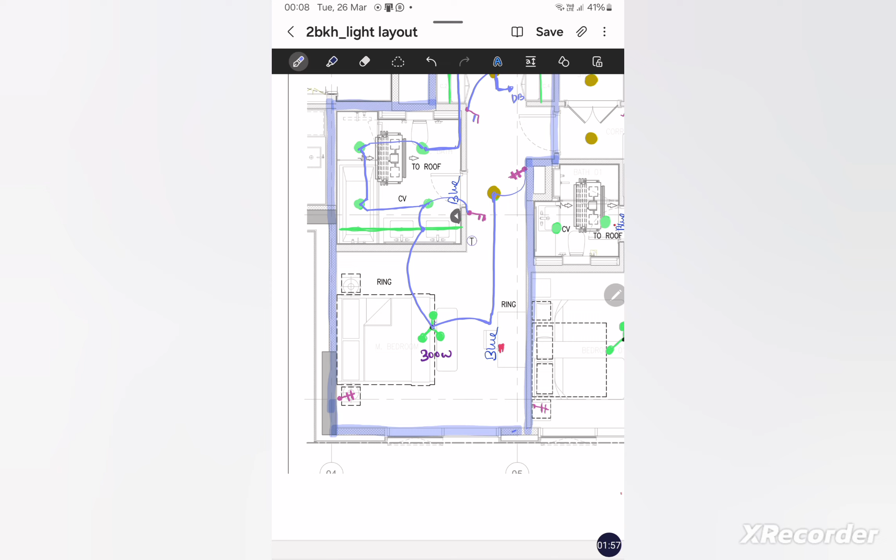This is a symbol of two-way light, meaning you can turn the light on and off from here as well as from here. So we will give control of this light and this light to a two gang two-way switch. So we give control here and we give control here. So now we can turn these two lights on and off from here itself as well as from here also.

In the case of a two-way switch, we have to give one separate loop switch to switch in order to control this switch as a two-way switch. So we will give one loop switch to switch.

More than that, if you design the light circuit, you will find letters mentioned here like A, B. Here somewhere you will find C, D. Here you will find E, D. These are the switches. So what does it indicate? With this you will find the same letter mentioned here, A, B and B. Meaning gang B will control these two lights and gang A will control this light.

So here there is a C and D. So this will be all C and this will be D. Meaning one gang, named D, will control the strip light and the gang indicated by letter C will control these 4 lights.

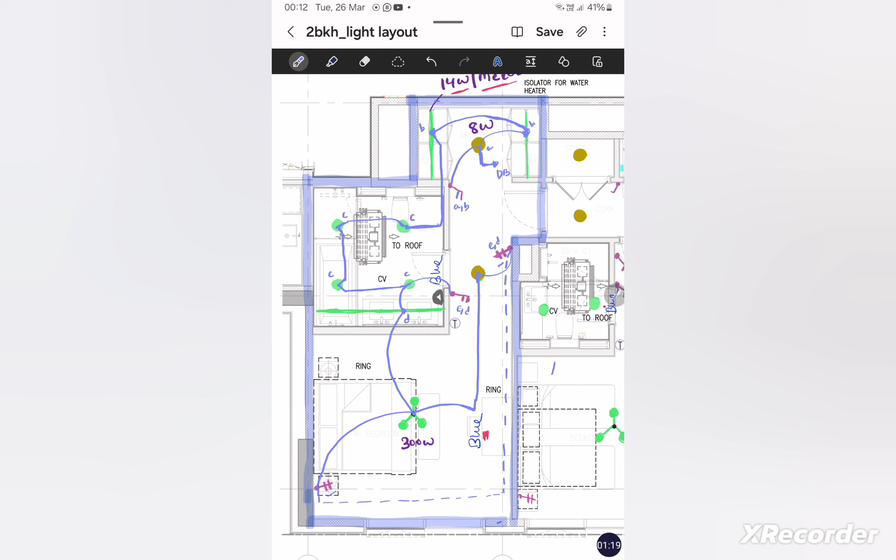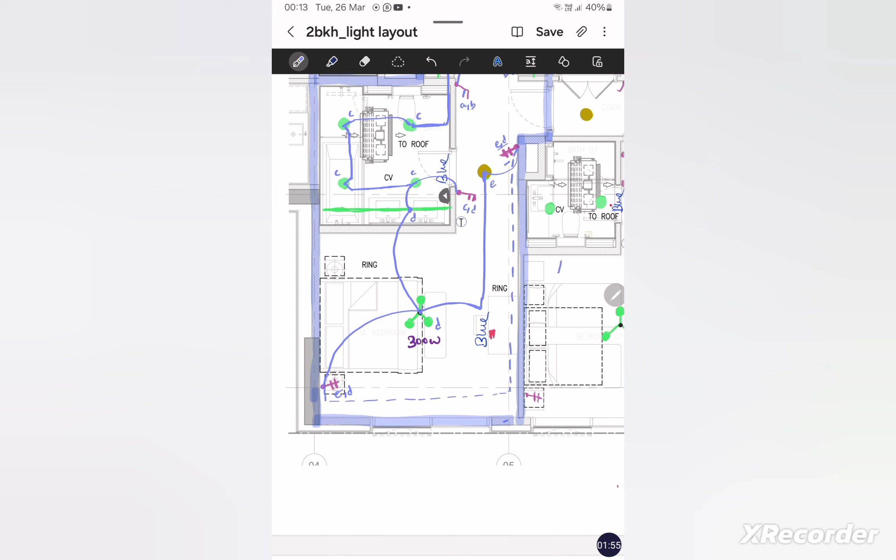In the same way, here it is mentioned E and D. So suppose this one is E and this one is D, meaning the D gang will control this light and the E switch gang will control this light. Same way here, it will be indicated as E and D. Why do we mention it 2 times? Because it is a two gang two-way switch, meaning we can do the same operation from here.

In the same way, we will make the light circuit formation for bedroom one also. As we know, we use blue phase for the power circuit in this bedroom, so we have to use the blue circuit for the light circuit formation also. So let's start. From here, we will take the power supply from the DB. Then I will loop to this light. From this light, I will give a loop to this light, and from this light to this light to this light, and finally from this light to this light.

Now let us quickly make the switch wiring. This strip light is controlled by this switch, so we will give one wire to this light to be controlled by this switch. This is a two gang switch which is controlling these two lights, so we will give the circuit from the switch to the light. Here we have one two-way two gang switch which will control these two lights and this light. So we will quickly give the circuit to this switch from this light, and this light to this switch.

If we do the numbering, then if this switch is A, it will control this light, and if this one is B and C, it will control this light and this light, and if it is E and F, then E will control this light and F will control these two lights.

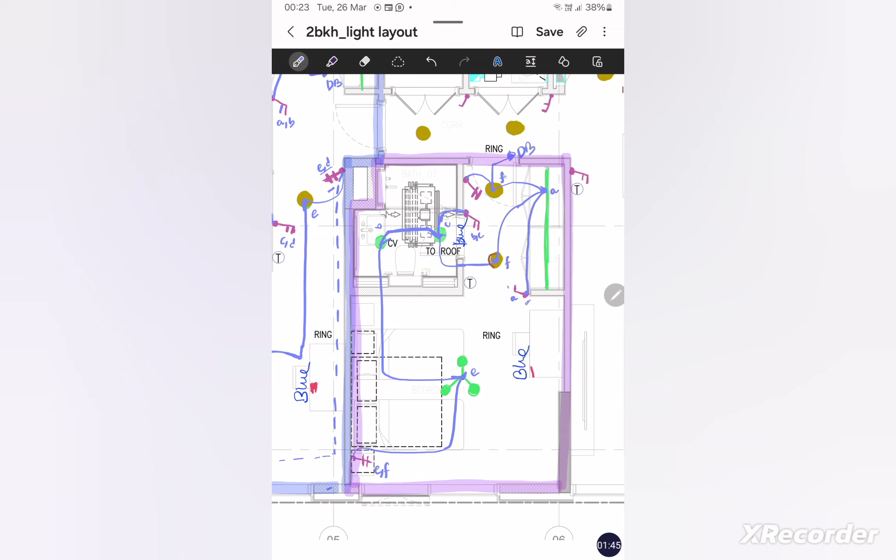Hope you are clear. The video will be too long if I do this for each room. Now you have the concept of how to make the light circuit formation, and you are now familiar with the DEWA regulation related to lighting. So I will prepare this and then directly start the video, to make this video length smaller.

As we know, when we were making the circuit formation for the living and dining area, we used the yellow phase. So now also we have to use the yellow phase for the light circuit formation. So here I use one power supply from the DB. I loop this chandelier light to this chandelier light, and from this chandelier light to the balcony light. And we give the switch wiring from this light to the switch and from this light to the switch.

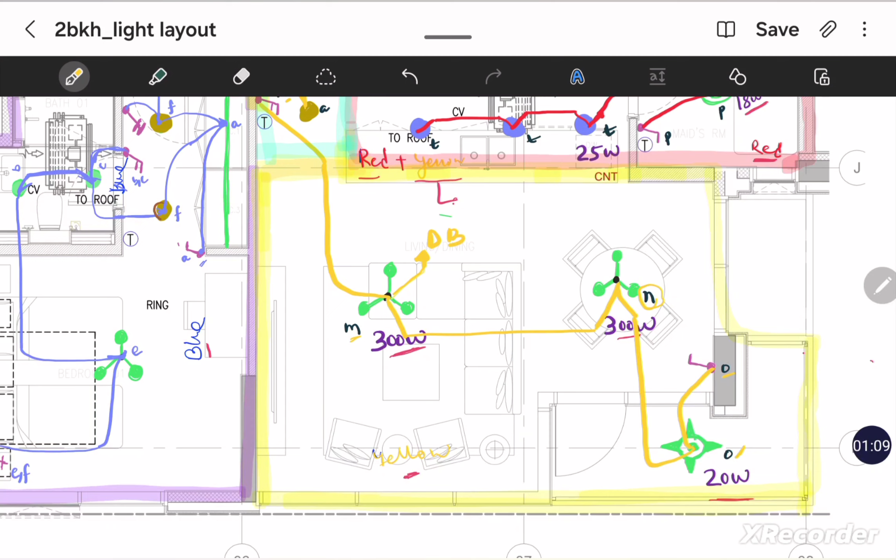Here I mention this switch name as M and N. So the gang indicated by letter M will control this light, and the gang with letter N will control this light. In the same way, this switch will control this light. For the single gang switch, it is not required to mention the letter, but we are learning at this stage. That's why I wrote it, but actually it is not required because there is one switch and one light. So obviously that switch will be for this light only. But we are in the learning process, so I wrote it so you have a clear concept.

In the same way, for the maid room, maid toilet, kitchen, and powder bathroom, we used the red phase for the power circuiting. So the same way we have to use the red phase for the lighting circuiting. So I started the wiring from the DB, and then we loop these two lights, then to the strip light, then to this light, then to the bathroom light, bathroom strip light, then to the powder bathroom light, then to the maid bathroom light, then to the maid toilet.

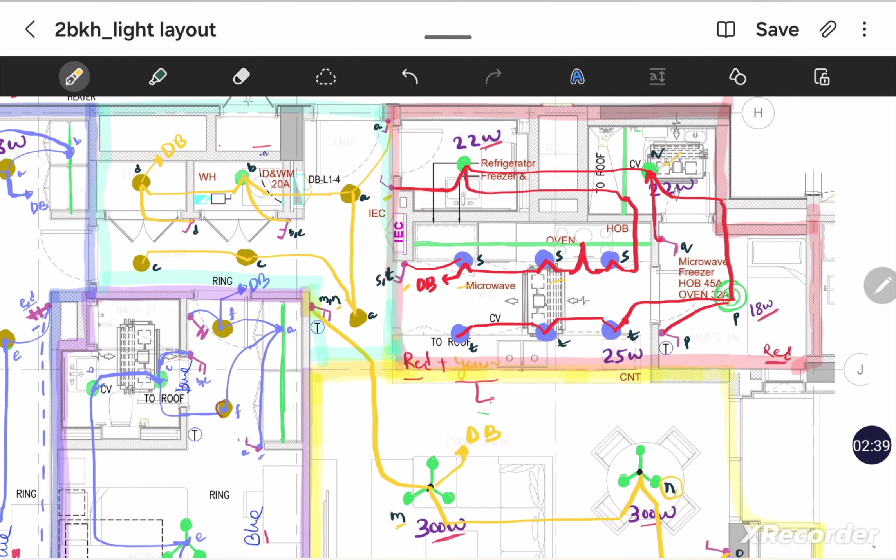And for the circuit wiring, this light to this switch, maid room light to this switch, powder bathroom to this switch, kitchen area light to this switch. Here I mention S and T. This S gang will control these lights and the T gang will control this light. The other light indication is not important because there is a one gang switch and one light only.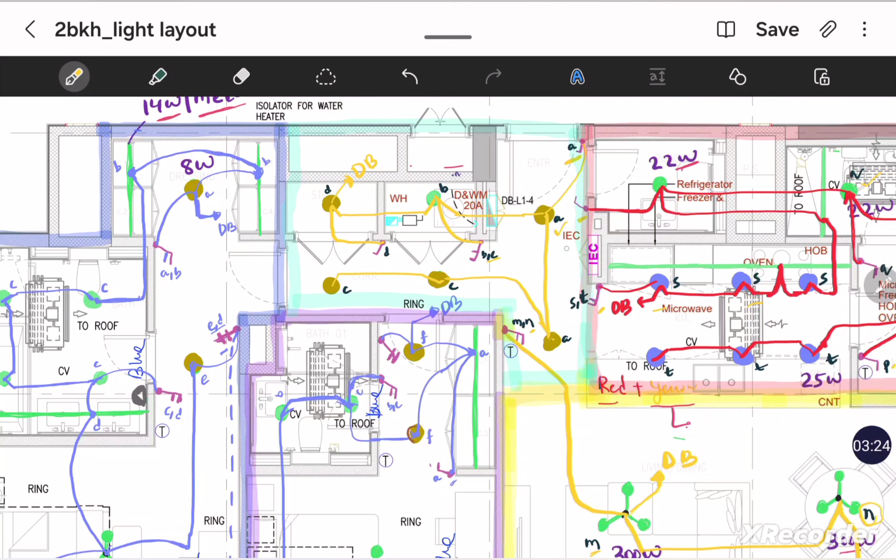The other section is the laundry area, store area, and the passage. Here we use the yellow circuit. We give the power supply to this light, then we loop this light to this light, from this light to this light, and so on. Here there is a two gang switch. I mention it B and C. Gang B will control the washing area light and C will control this passage area light. This switch will control this light, and this switch will control the store room light.

Hope now you are very clear how to make the formation for the power circuit and the light circuit as per DEWA regulation. I also explained in this video the important regulations highlighted by DEWA related to light circuiting and power circuiting. Now we will go for the load circuit preparation. This will be the tedious part. If we make this circuiting nicely, then the load scheduling will be easy. Otherwise we have to do some trial method, like changing this yellow circuit to a blue circuit, and then again reflect it in the load schedule. But to make this video, I already made a trial, then made this load schedule and this circuiting. So our load will be balanced. But we will learn it one by one.

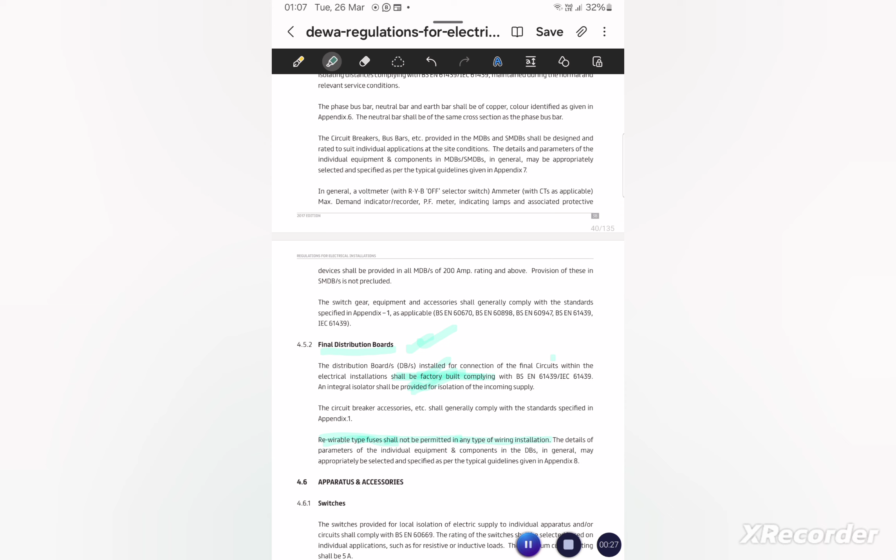When I started the power circuit formation, before that I explained the important regulations related to power circuit formation in the DEWA regulation. In the same way, before the light circuit formation, I gave some important DEWA regulations related to light circuit formation. Now we are at the stage of preparing the load schedule. So let us study the DEWA regulations related to the final distribution board. If we know the important points in the DEWA regulation related to the final distribution board, then we can easily make the load schedule.

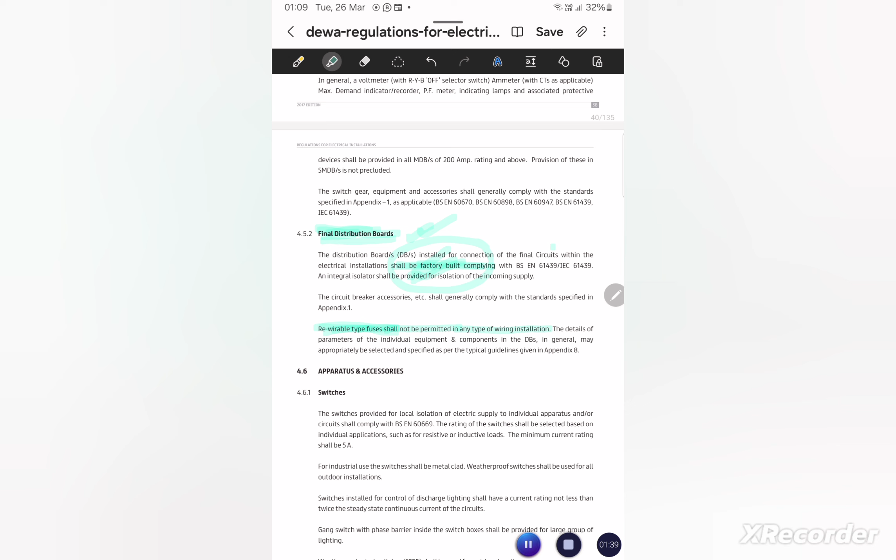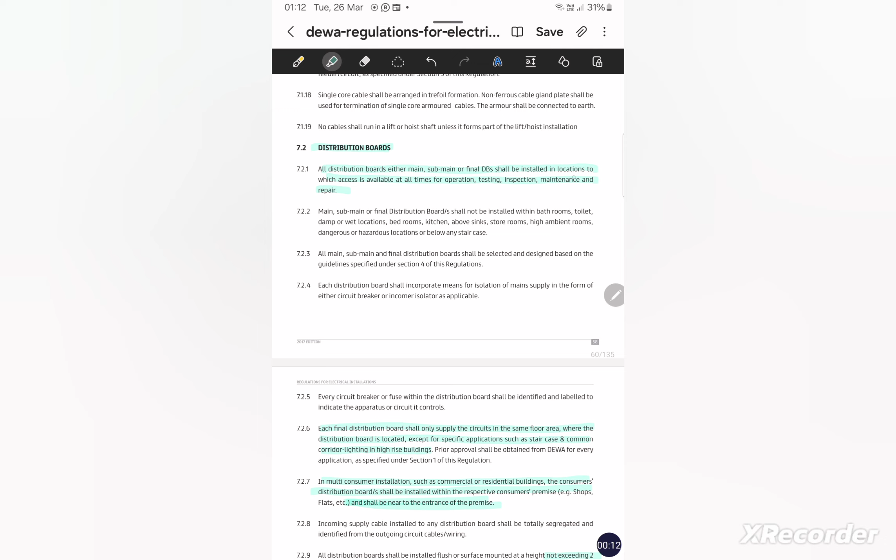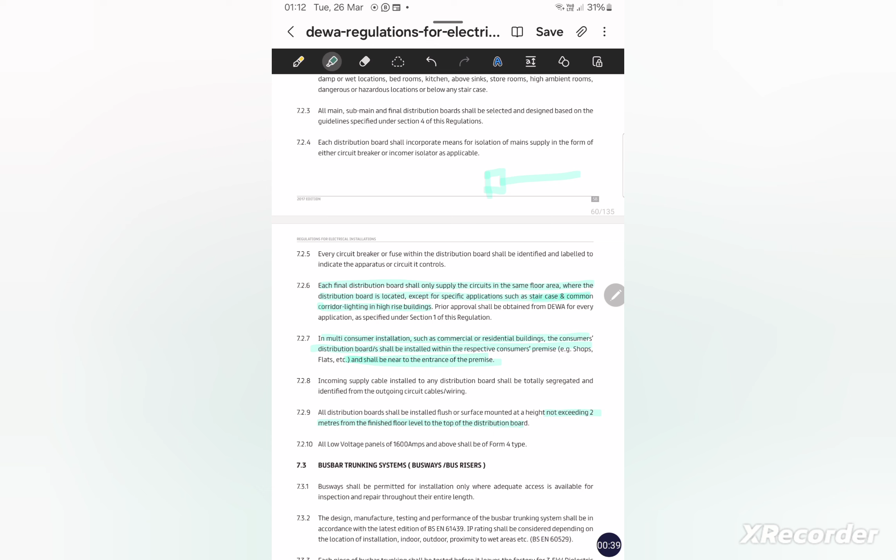The first thing mentioned in the DEWA regulation for the final distribution board is that it should be factory built. The other thing is that rewirable fuses are not allowed in the final distribution board. Only breakers and isolators are required. Another important point is that the distribution board must always be kept in an accessible location. And apart from that, DEWA says the final distribution board must feed same floor services, except for those loads in the staircase or in the common corridor in a high-rise building.

Other than that, DEWA mentioned that in a residential building, the distribution board shall be installed inside the respective consumer premises. Okay, it means if we have one flat, then we cannot install that flat DB outside. It should be inside the flat but near the entrance.

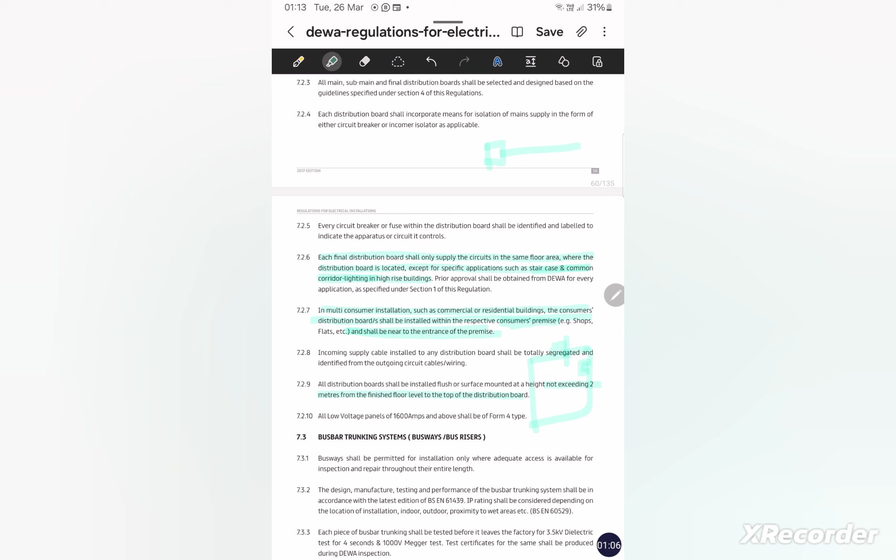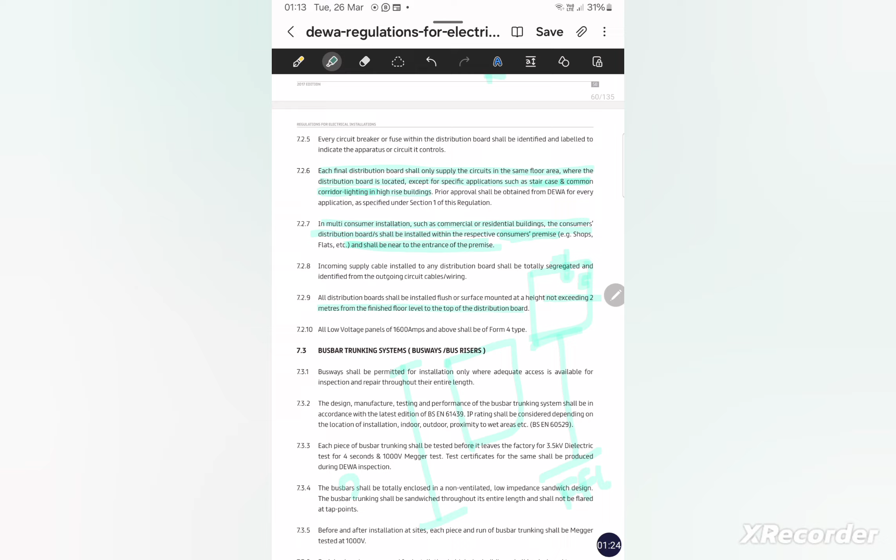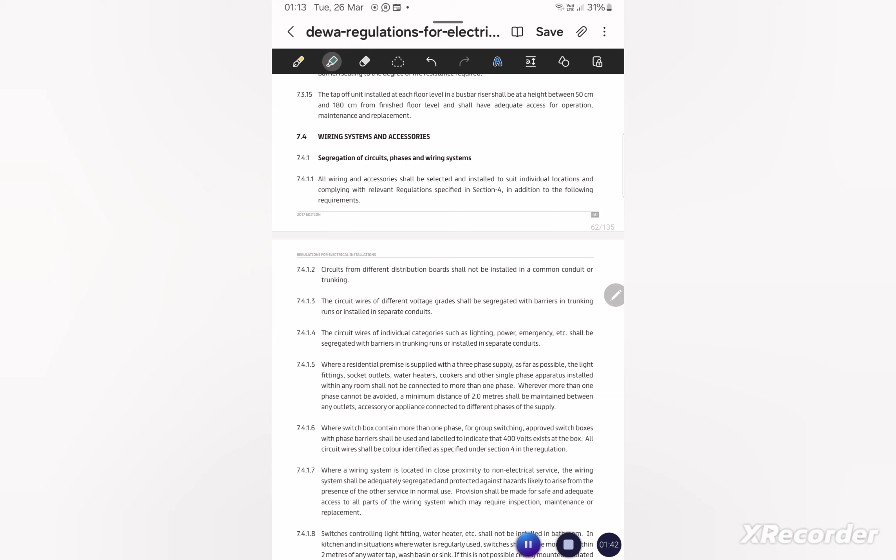Okay. Apart from that, DEWA regulation highlights that the height of the DB from the finished floor level must not exceed 2000 mm, that is 2 meters. Here it is mentioned 2 meters. There are some more important points mentioned related to the final distribution board in DEWA regulation that we will discuss now. In DEWA regulation we have the load schedule format.

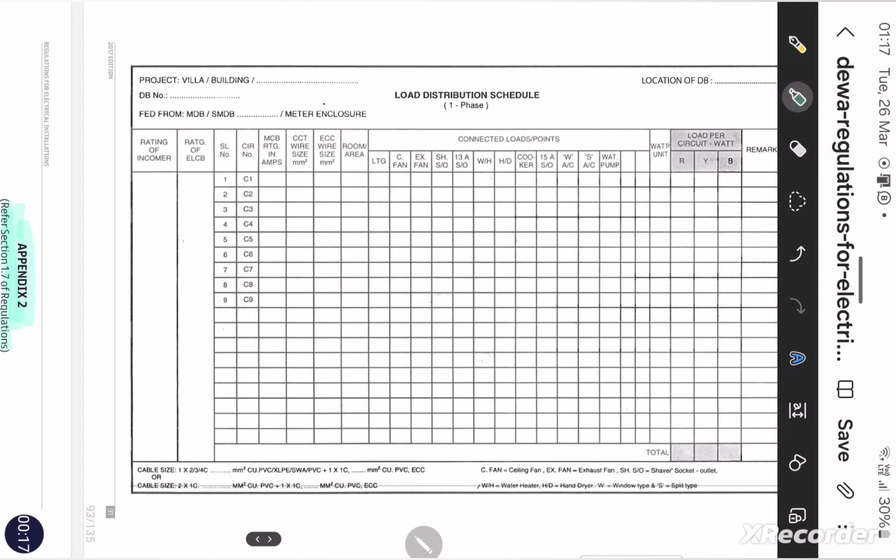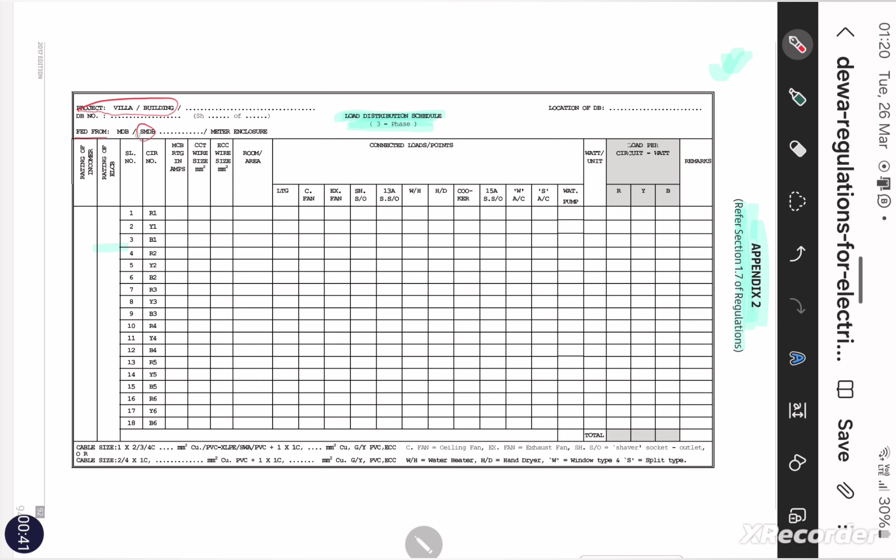Here we have the project name. We have to write the project name. Then we have to write the DB name. Then we have to write the upstream panel name from which that DB is fed. It could be an SMDB or it could be directly from the MDB. Then we have to write the location of the DB. Okay. And apart from that, we will have several other details also. We will discuss them one by one.

Here you see there is a rating for the incomer. Here we have to write the rating of the incomer. Just for an example, from the total load connected we come to the conclusion that it is a 40 ampere 4 pole isolator. Okay. There is one column for the rating of the ELCB, which is very important. As per DEWA regulation, a maximum of 6 circuits can be fed from one ELCB. So section 1 should be controlled by one ELCB. In the same way, the other 6 will be controlled by another ELCB.

But it is not only applicable for 6 circuits. One ELCB can control 3 circuits also. That could be section 3. And the other circuits can be fed from another ELCB. That will be section 4. Hope you got the concept. The conclusion of the discussion is that one ELCB can control a maximum of 6 circuits. Okay. Minimum it can control 3 circuits, but maximum we can feed 6 circuits from one ELCB.

Other than that, as per DEWA regulation, for the light circuit, which I already discussed but I'm repeating here, the ELCB rating must be 100 milliampere for normal lights, and for special conditions it could be 30 milliampere. But here we will focus on this because we are taking an example of a normal flat. Apart from that, we discussed that the light circuit MCB rating must be 16 ampere. The wire size should be 2.5 square mm.

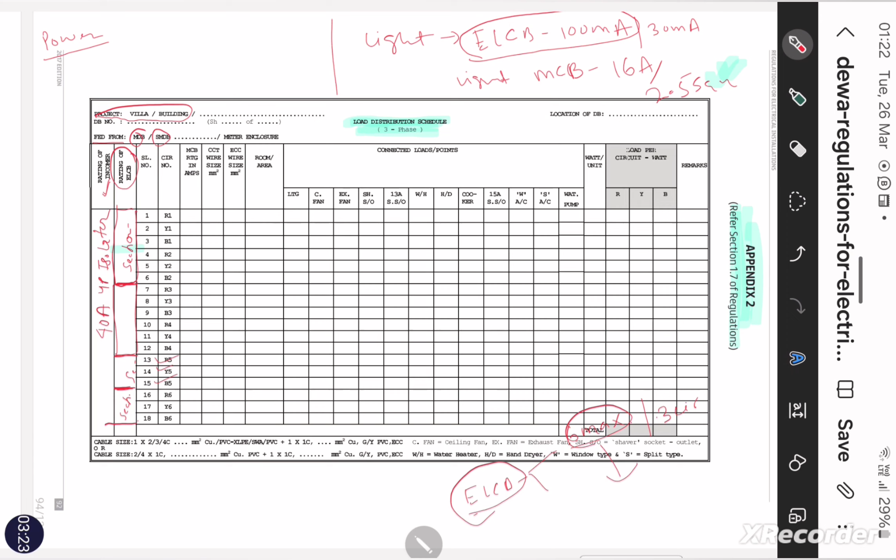In the same way, for power, the ELCB rating is 30 milliampere and the MCB rating will be minimum 20 ampere, and depending on the load it can go to 25 ampere, 32 ampere, 40 ampere and so on. Apart from that, we discussed that if there is a radial circuit for general purpose sockets, then the MCB rating will be 20 ampere, and if the general purpose sockets are in a ring circuit, then the rating will be 32 ampere. Apart from that, we discussed that the load assumed on one single socket is 200 watt.

The other thing which I forgot to discuss for lights is that the total load we can connect in one light circuit is 2000 watt. Here I want to highlight one very important thing which will help us to make a load schedule. Suppose in this section we have MCB ratings of 20 ampere, 25 ampere, 20 ampere, 20 ampere, 20 ampere and 25 ampere. So the ELCB rating will be double the minimum MCB rating, and in some cases it will be double the maximum MCB rating.

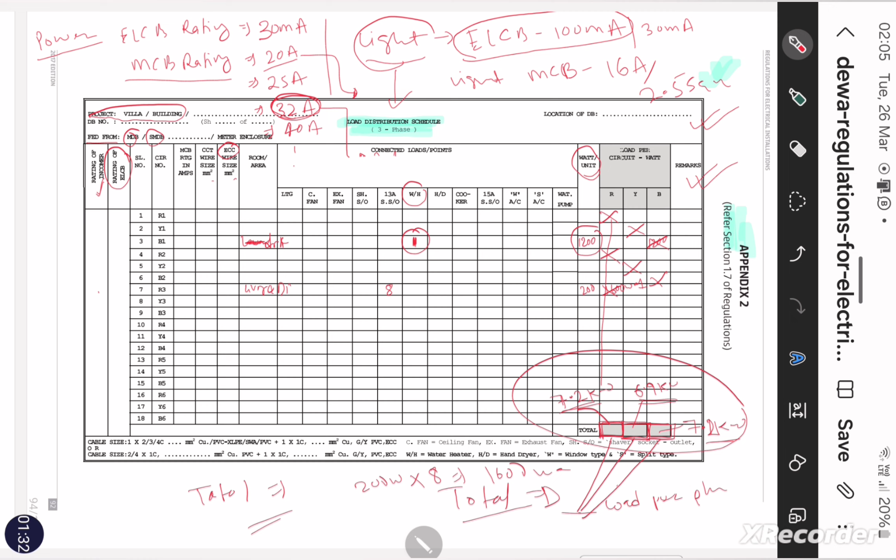This is a very long video. In my next video, I will prepare the load for the example I have taken, that is the 2 BHK flat, one by one, and we will learn step by step how we are taking the load and how we are balancing the load in a load schedule. So in the part 2 video, I will prepare the load schedule based on the 2 BHK flat example. I hope you find my video informative.